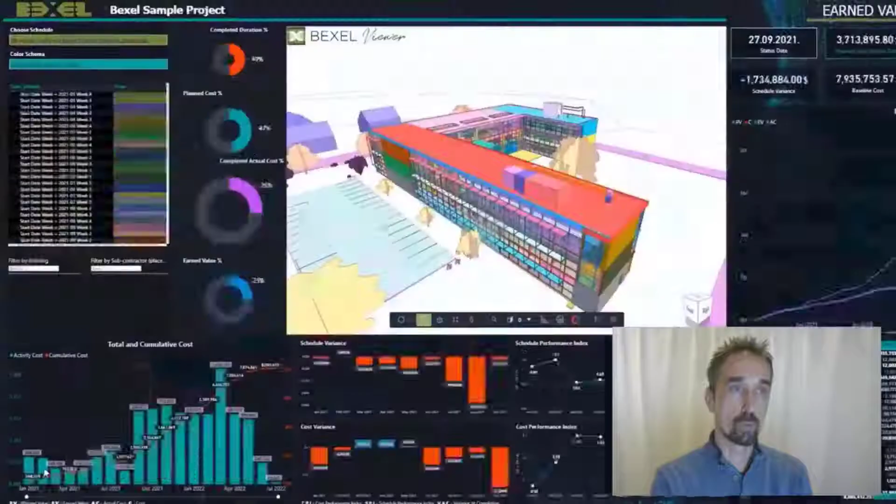What we wanted to achieve by integrating Bexel Manager workflows and new cloud-based solution is to establish a cloud-based single source of truth, so that users can access and manage project data, but at the same time publish and share all relevant information using our Bexel Manager online services such as Online Viewer, Online Power BI reports, and Portfolio Manager. Finally, we want to present our crucial information in a way that allows all project participants to clearly visualize and control all key project indicators using interactive dashboards.

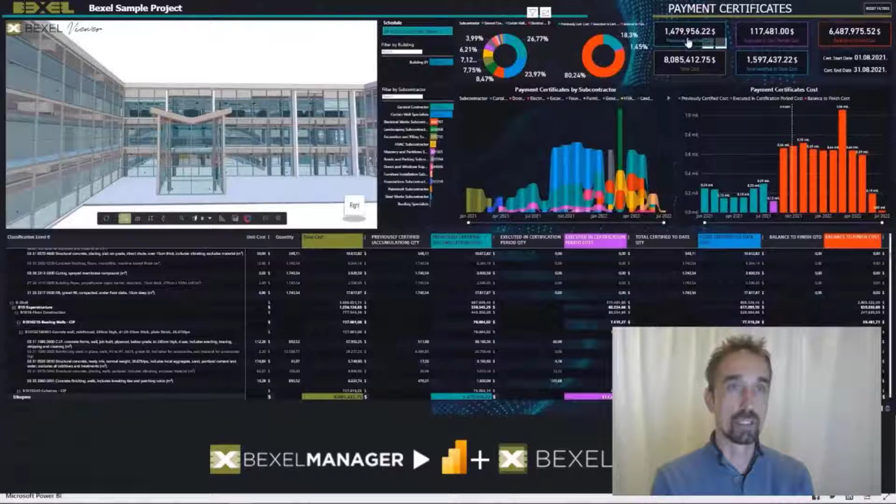Our goal is to utilize integrated BIM data so that produced information is already presented in our integrated BIM model in the best possible way. Our open cloud-based solutions will allow you not just to read this BIM information as professionals or experts, but also to present information in a very direct and easy way to all stakeholders in the project that don't necessarily need training or experience in advanced BIM applications and advanced BIM management tools to understand and use it.

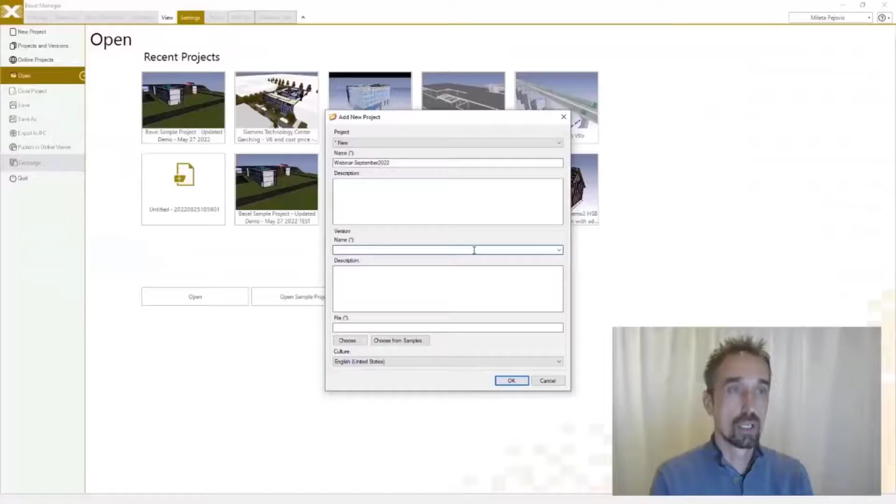Now I would like to guide you through the entire process step by step from the beginning, and we are creating a new project. The initial version of this project and its revision will be created, and we are selecting multiple IFC files that shall be federated into one BIM project. One of the most important things, especially in the early stages of a project, is coordination and collaboration of all project trades, and therefore frequent and progressive clash detection analyses performed on a project are extremely valuable. Our workflow allows you to almost fully automate the entire process by using our customizable templates for clash detection, and at the end to explicitly and clearly present all results using interactive Power BI dashboards.

First, we need to create some selection sets and organize BIM model elements into specific groups that shall be used for clash analysis. Here you can see a list of different templates for creating smart selection sets, and these are commonly used and can be reused on almost every project. In this case, I will use the one called Clash Selection Sets Sample Basic, and before loading it, I just want to explain how these template files work and how you can customize them.

On the left side, you can see the column which represents the location of your selection sets and in which location your selection set will be saved. The second column, which is called name, represents the name of each selection set. And the last column is called query, which represents rules that are used to create smart selection sets.

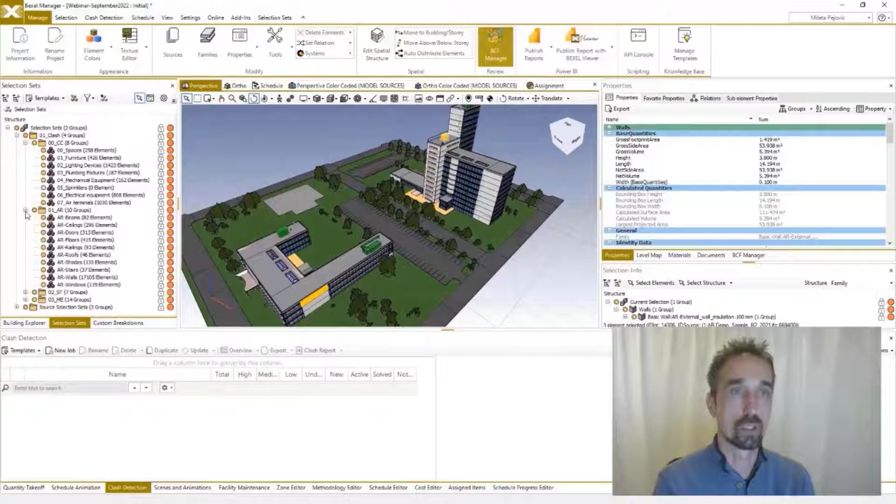Similarly, as we imported element groups organized by trades used to find collisions, we can also use available customizable templates from our knowledge base, and this knowledge base is at the moment local for each user, but very soon we plan to make this cloud hosted and available for all our users with respective credentials.

These predefined clash detection jobs are based on a common BIM clash matrix, and you may see how this Excel file looks. On the left side again, we have the first column with a list of clash detection jobs by different names, and we have also included severity of clash detection in their name.

First, second, and third priority of the clashes, and in the columns for the left and right clash detection groups, we are specifying which selection set will be checked versus a different selection set for collisions. And in the last columns, we are specifying clash type and tolerance if it's needed.

Once we decide or create the wanted template using the option open, these clash jobs will be imported into our system. You can see the list of imported clash detection jobs, and you see that the current result is 0 because we didn't run it yet, and now we can decide whether to run all clash jobs or only selected ones.

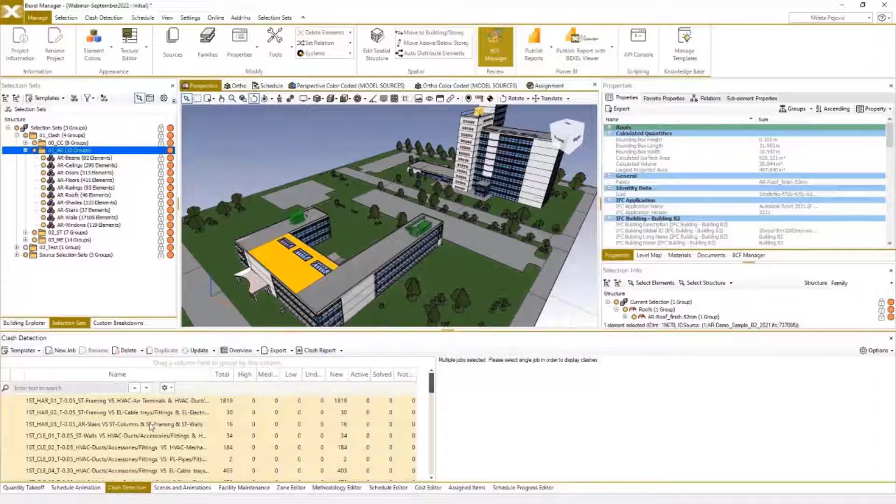And as in similar platforms, all results are listed and the user can go through each found result in the viewer just by clicking on it. For each found issue, we may see which element is included and what is the location of the collision in the model map. If we want to organize and group these clashes into multiple groups, the system also has an option for automation, and we can instantly group all the clashes that include the same elements.

In this case, I will use the option to group by left side, and as a result, the system will group all beams that are clashing with multiple HVAC ducts and pipes multiple times, grouping each beam with multiple collisions with different MEP ducts into one group. So now you may see that each group contains one beam colored in red and several ducts colored in gray that are colliding with each beam.

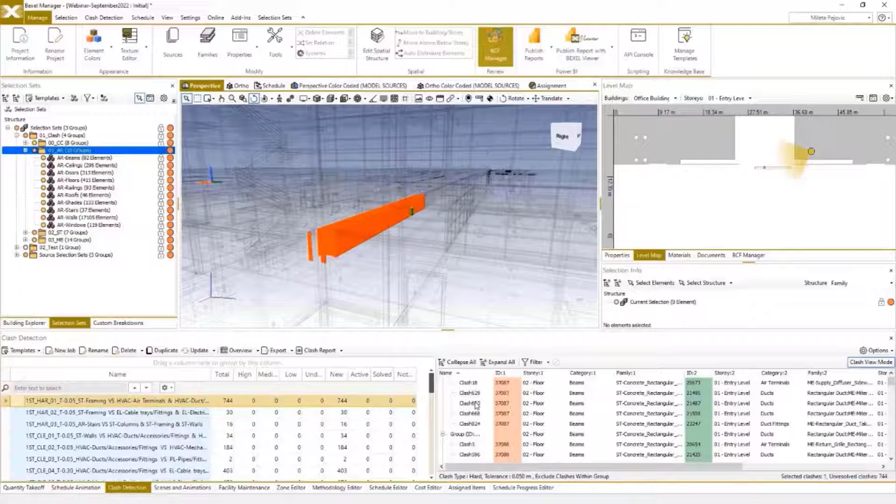All found clash results can also be organized into BCF files or exported into PDF, HTML, or Excel spreadsheets that are pivot ready and useful for progressive reporting of your coordination process. But to elevate the quality of created reports, we enabled the export of clash detection analysis into interactive Power BI reports with an embedded model viewer.

So to streamline the process of embedding the model viewer into Power BI, the steps are really simple and I will just show it. The user just needs to export the current Bexel Manager 3D project into an online viewer using the Publish to Online Viewer option and select options according to our preferences. We can even choose whether to export all model elements or just specific ones.

And we can also divide or organize BIM elements in our viewer based on IFC model sources or by selection sets or BIM categories. Once we decide, we can just click publish and the system will take some time to export the entire project depending on the size and also based on the number of BIM model elements and their complexity.

And of course, based on the internet speed as well, once it's completed, the system will give you information with a web link to access the published 3D model online. And if you're not logged in, you can log in to your account, and based on credentials, user can access different online models or projects.

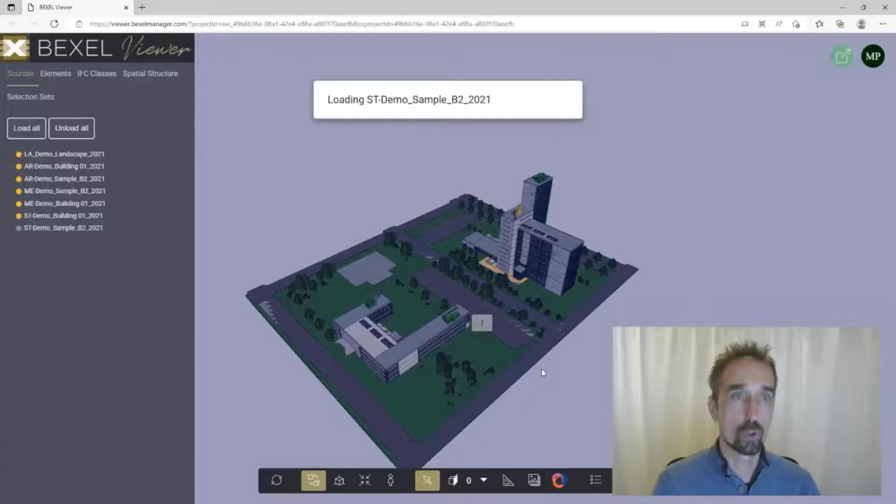Once you're logged in, on the left side, user can choose which models and sources they want to load in the viewer. In this case, I will load all, and as you may see, the system currently opens all sources of the exported file, and we can just review the 3D model using any web browser or mobile device.

All properties related to selected elements or to 3D model elements are also available on our viewer, and you can see all the values of these properties of selected elements. Since we also have exported selection sets from our project, we can see the list and entire hierarchy of these selection sets, and we can use this hierarchy to select elements or change their visibility, similarly as we could do in our desktop application just by clicking these visibility indicators.

Another useful feature here is the ability to share the exported online model with other participants, so you can just type in the email address of other users and they will be receiving a notification with the same online link so they can open it or review it by themselves. Of course, they also need access rights in order to use it.

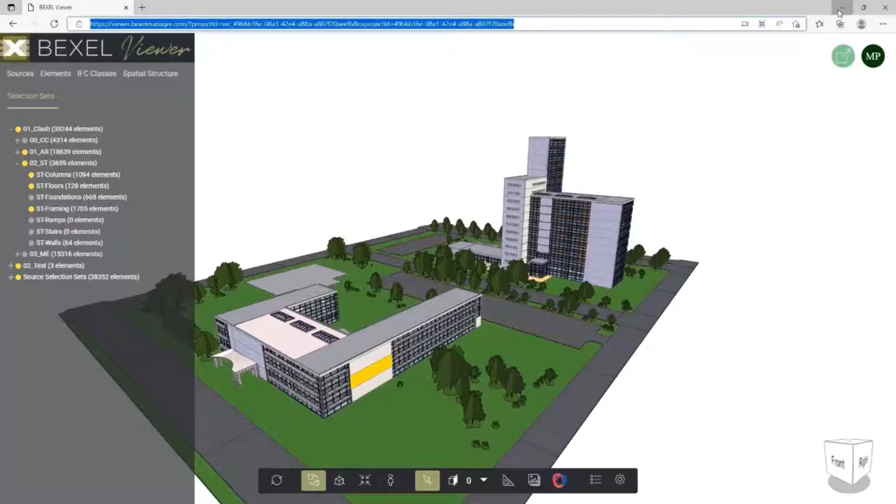So since we have this exported web address, we can copy the link and use it in our Power BI report. So the next step is to go to Bexel Manager and use publish Power BI report and paste this provided web link to our online model.

During this process, user can choose which clash analysis they want to export, and once the exporting process is completed, we can open the Power BI report using a Microsoft Power BI desktop application and edit visuals, charts, or even change the language if required.

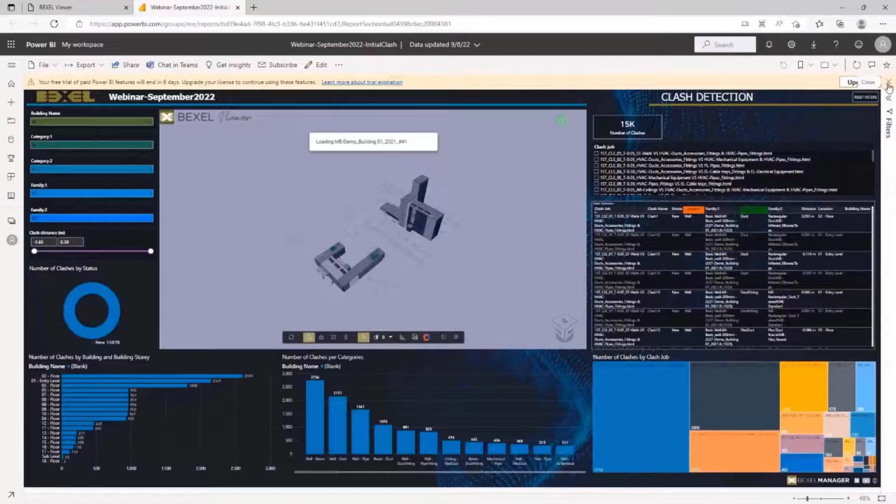I will skip this step and just show you the final published Power BI dashboard. This one is free and available as an out-of-the-box template, so anyone who has access to our online viewer can use these visuals and link it to any 3D model they create, and they can also use their own Power BI reports and adjust them according to their needs.

As you may see, the entire 3D model view is loaded. All 3D source files, since I checked that option, are automatically loaded. And on the right side, we may see the list of all clash detection jobs.

And since everything is interactive, once you select any of these clash jobs, the lower table will show you all these results, each instance of issues, and directly in the 3D view, you may see all these found issues distinctively colored in orange and green, so you may easily identify elements which are in collision, as shown in these tables in the corner.

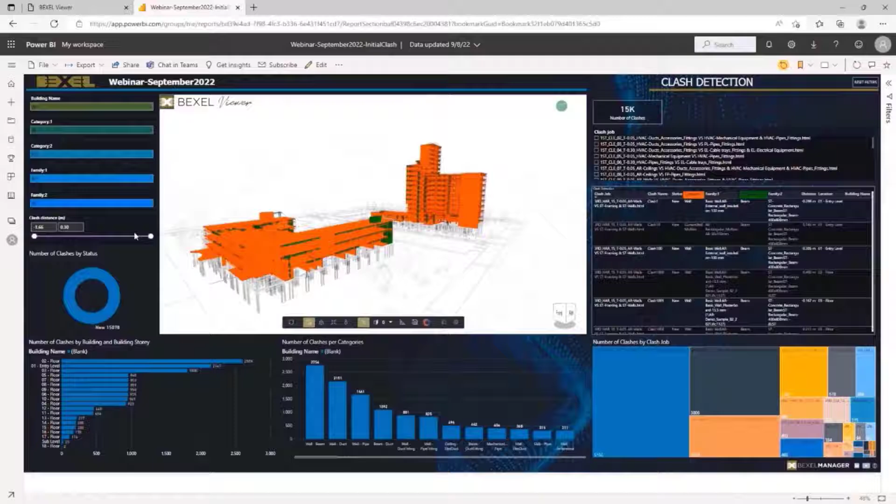In the lower part of this Power BI report, you may see that all issues are organized according to buildings and building levels, and in the middle, all found issues are also organized by different BIM elements. The slider on the left side can be used to filter down specific clashes based on the penetration distance between elements.

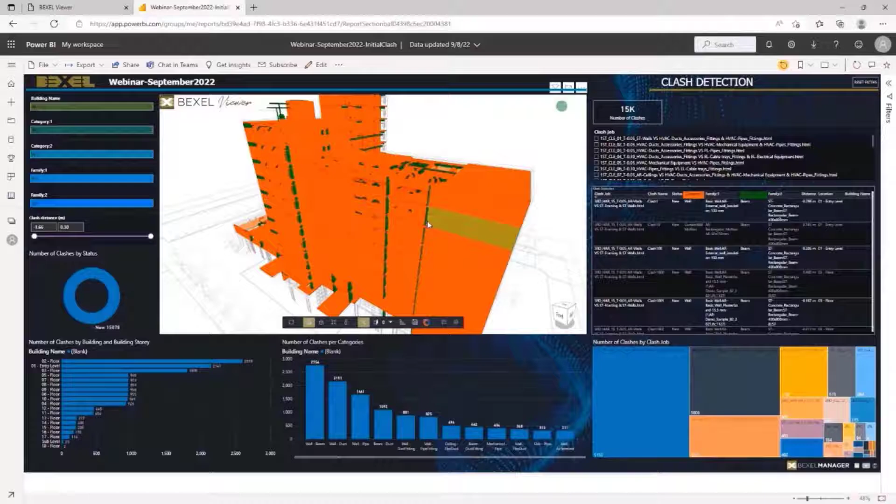These templates are free and available out of the box, but as I've said, if you have the Power BI desktop application, you may create your own templates, change their look, and change the information you want to show, and the process is straightforward. You don't have to do anything additionally to have the model view connected to relevant data because everything is already connected. You just have to publish your Power BI report.

Another extremely useful and new way to publish and share not just clash results, but all relevant project information, is using our cloud-based portfolio manager. It's a unique online platform that collects all BIM data from multiple projects and multiple revisions of any project. All data is saved on a cloud-based common data environment, and published information can be stored in a cloud-hosted database or on client premises. To use the portfolio platform, a user needs to be subscribed to this service and use credentials to log in. With the respective access rights, you'll be able to explore projects and information based on your credentials.

Results related to clash detection analysis can be found in this drop-down list, and predefined charts for multiple revisions of one project look like this.

The platform is highly flexible and gives you the ability to rearrange and reorganize these charts according to your needs. For example, you may track how the number of clashes was changing during different project stages and in different model revisions through time. All clash charts can be exported into PDF, images, or Excel files, and this platform can be accessed using mobile devices as well.

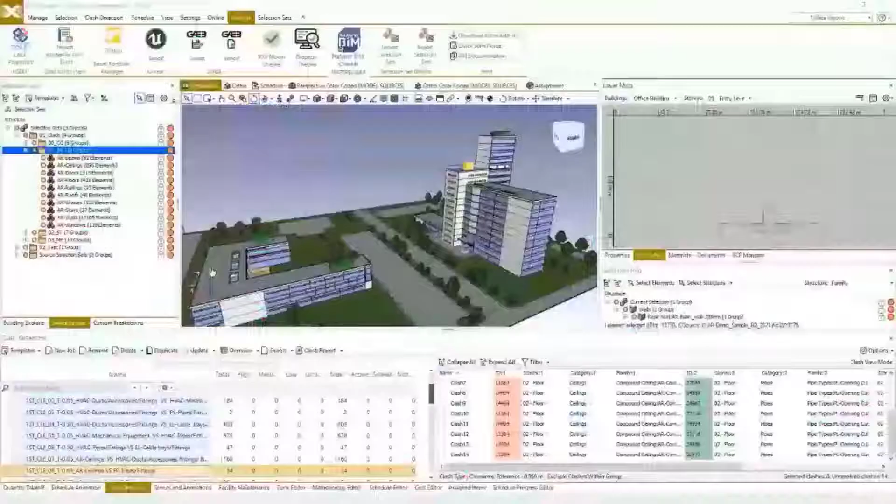The next step in the workflow is BIM data management, and Bexel as an integrated BIM platform allows experts to manage and inspect BIM data using advanced BIM data checks. The entire process is automated using add-ins for IDS verification.

Based on predefined check rules, the system can analyze if all BIM elements have added mandatory properties required for each project stage. These property checks are based according to international standards or according to any project information delivery specification. To execute the process, I will use an add-in called Property Model Checker, which can perform these automated BIM checks.

User can choose which file will be used for defining BIM check rules, and the file used for BIM check definition is usually Excel by default, since common users are familiar with Excel files and can easily change them, but we also have the option to use JSON files as well.

Using the import option, we can import some BIM check templates, and very soon these will be part of our free online knowledge base. So now I want to explain how this template file works.

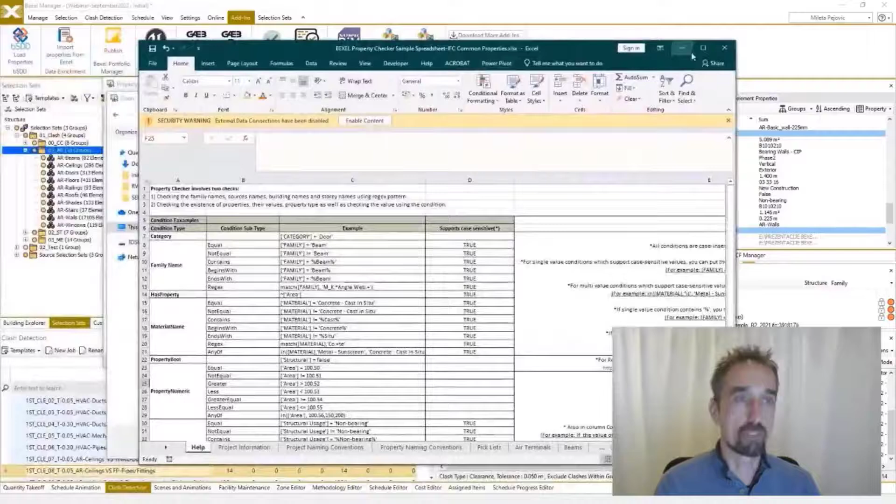The first sheet gives you information on how to specify and create your rules. The second sheet defines project stages in which required properties should be populated. You may add as many stages as you want.

Category name property is the place where you can set what shall be used to define various properties in each sheet. A commonly used option here is category, and then each sheet will be considered as a different category containing required properties. Project naming convention sheet is the one where we can specify naming convention and pattern for naming BIM files,

for building name, and for name of each building story, if there are any requirements related to that. Property naming convention sheet is the one where we are specifying or setting up naming pattern for different BIM elements or IFC entities. The first column is used to set different entities, and the second one is used to specify naming pattern for each of them.

In the property name, we have to set which property shall be used to check naming pattern, and in our case here we are using the IFC object type property for that purpose. Pick list sheet is used if we want to predefine specific values for any property and to specify all allowed or requested values for different properties.

Once we load the Excel template, the system will show us the list of recognized categories or IFC entities in the project, and we can now select for each project stage we want to check properties.

Each BIM check can be executed separately, or multiple checks can be executed simultaneously. Also, you can execute selected BIM checks for selected elements only, and results are visible instantly.

By using the option evaluate, the system will execute all BIM checks for all elements, and after its completion, the user can decide whether to create selection sets from these results or to export results to Power BI reports.

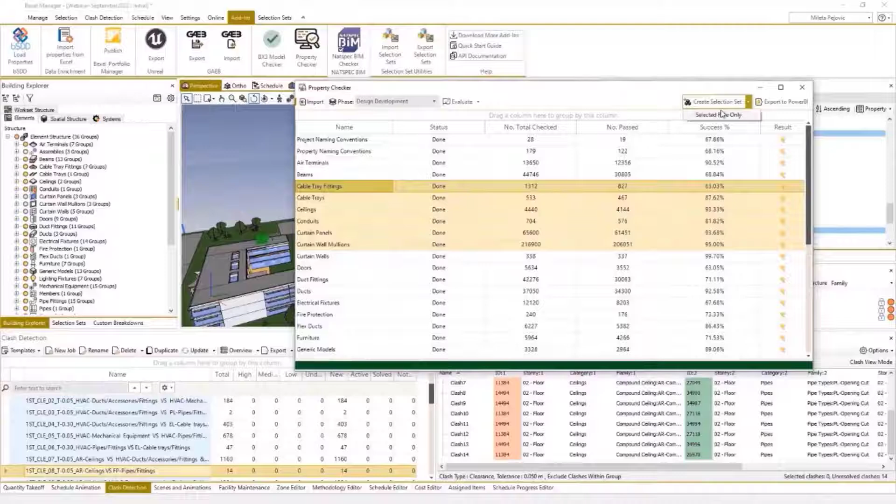It can take some time for the system to execute all BIM checks, and again everything depends on the number of properties that are required and the number of elements containing all these requested properties.

You can see how results can be explored, and also using the option create selection set, we can create selection sets of all these results or publish results to Power BI reports directly.

By creating a selection set for all results, the system will make all selection sets containing all found issues, and these issues can be addressed directly to BCF files just by drag and dropping from the selection set folder directly to the inbuilt BCF manager.

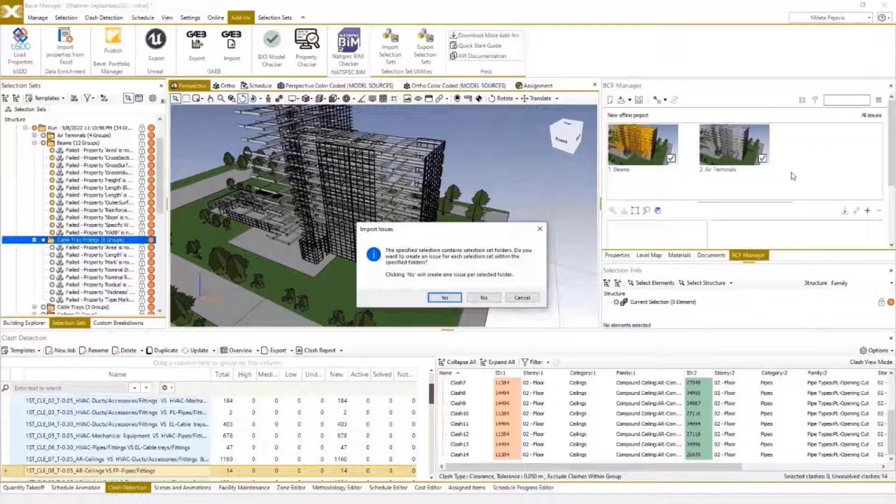By doing that, we can inform responsible participants or design teams to resolve these issues. This can be done for one or multiple selection sets at the same time. BCF files can be saved locally, or they can be communicated directly using an online cloud-based platform.

Now I will publish the results of this analysis to our portfolio platform. The system recognizes the project, and the revision will also be automatically and incrementally added online. When we go to the web platform, you will immediately see the updated published information.

For IDS property checks, initially the chart looks like this, so we can see the number of found issues is different in two different revisions of the same project. Visuals can be changed, and we can see property check results between version 1 and version 2.

Or we can just switch these tabs and reorganize charts. Also, we can do the same thing for IDS or BIM checks by percentages. And of course, this type of chart can be linear, or we can change it to bars.

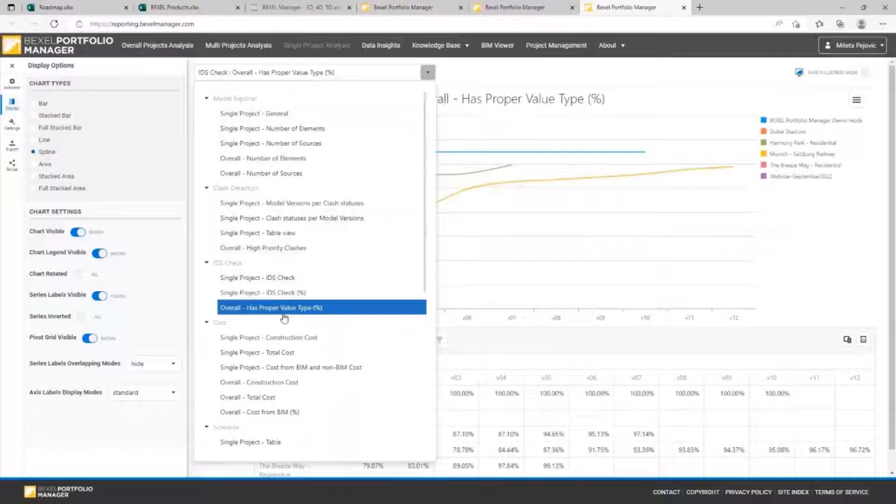We can change visuals if we want to see, for example, not just this revision of the project, but compare this project with other BIM projects and see how many property issues other similar projects had in a specific period of time or in a specific project stage.

As I mentioned, using Portfolio, you can also analyze other key performance indicators of your project revisions, such as the difference between planned and actual schedules and cash flows, various construction and cost analysis, or even earned value analysis. But I will talk about some of these reports later on when we explain schedule and progress entries.

Another extremely important thing I want to mention is that Portfolio Manager has a project and user administration where administrators can manage projects, project revisions, and users. Project admins can see projects and project revisions with respective information on who and when exported different project versions.

In the project user window, the admin can add or remove users from the project using their emails. This is also the place where different roles and permissions can be assigned to different users, and admins can create or delete entire projects.

Also, users can review the history of project revisions with the respective information, and admins can organize or delete these revisions as well.

Again, these are current options, but as I mentioned before, all these services will become part of our unified cloud-based Bexel Common Data Environment with more integration and collaboration options.

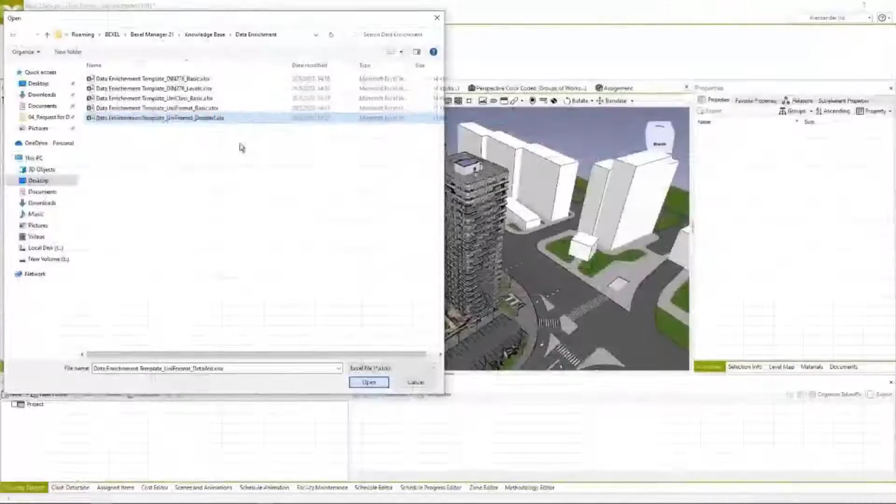Today I will use a bit more advanced template that uses 8 different properties as rules, and based on them, an entire property set will be added, and 2 new text type properties with the respective values according to Uniformat classification will be created and added to BIM elements.

After a short loading process, everything is completed. The data enrichment add-in also creates smart selection sets every time we run it.

And as you may see, the entire list of all elements with added property values. This can be used to check which elements got property values, and here we can also check if all elements are enriched. By selecting elements in the property window, newly added properties are visible.

Bexel Manager also has an online integration with the buildingSMART Data Dictionary, so it is possible to automatically download and add these properties to model elements. The process is very simple.

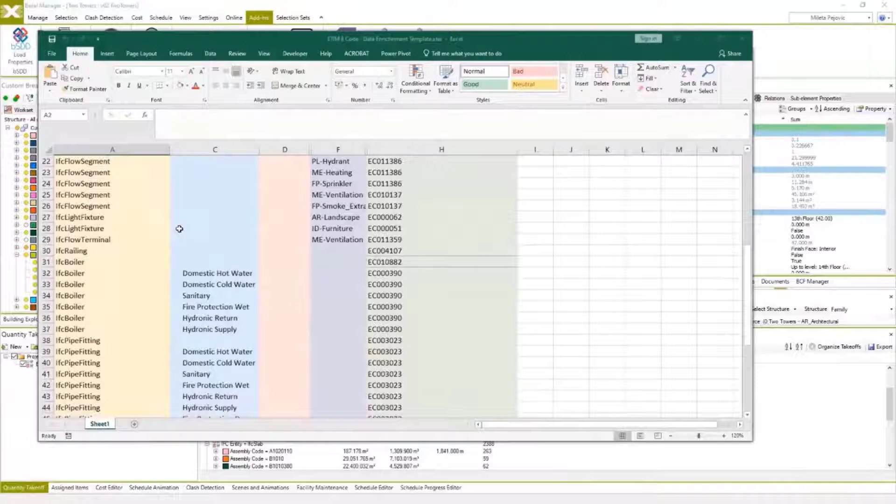To automate everything, I will use the data enrichment add-in again, but this time all elements will be enriched with a new property called BSDD code. This code will be used to match model elements with the respective ETIM8 database from BSDD and enrich elements with the respective properties according to the assigned ETIM classification. In the property window, all elements got various BSDD code values according to ETIM classification.

Now I will use the Load Properties BSDD add-in to connect with the BSDD database and select properties that we want to add to BIM elements. After completion, the system informs us that properties are loaded from BSDD service, and we can now explore all these downloaded properties added to different BIM elements based on their ETIM code.

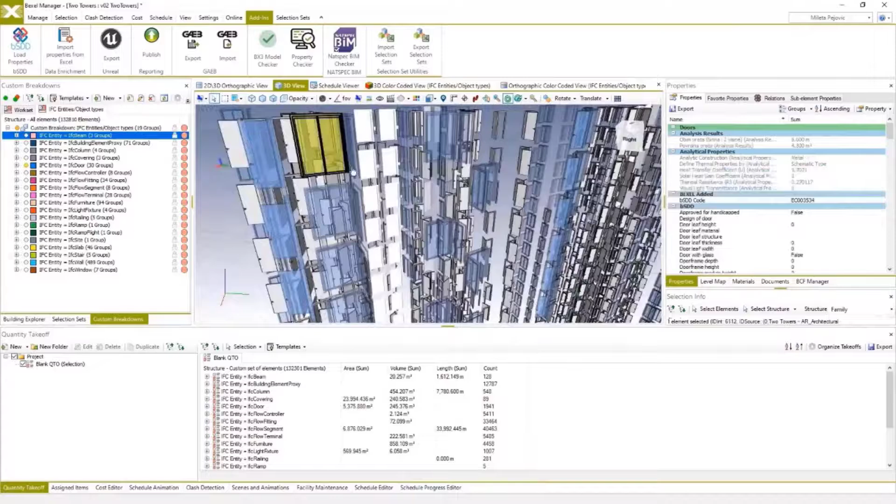In the custom breakdown, we can see that different IFC entities now have different BSDD properties added. For example, beams, doors, or slabs. Each entity has different properties assigned, and we can see the same for MEP model elements.

Now that required properties are automatically added, we can again automatically or even manually populate different values for each created property. All added properties and their values can be exported from Bexel Manager back to Excel files, or we can just export the IFC file directly from Bexel Manager, and all added properties will be saved.

The second approach is using existing cost classification standards or databases and importing them into Bexel Manager. In both ways, the system automatically calculates quantities and prices, so we can use it for further analysis.

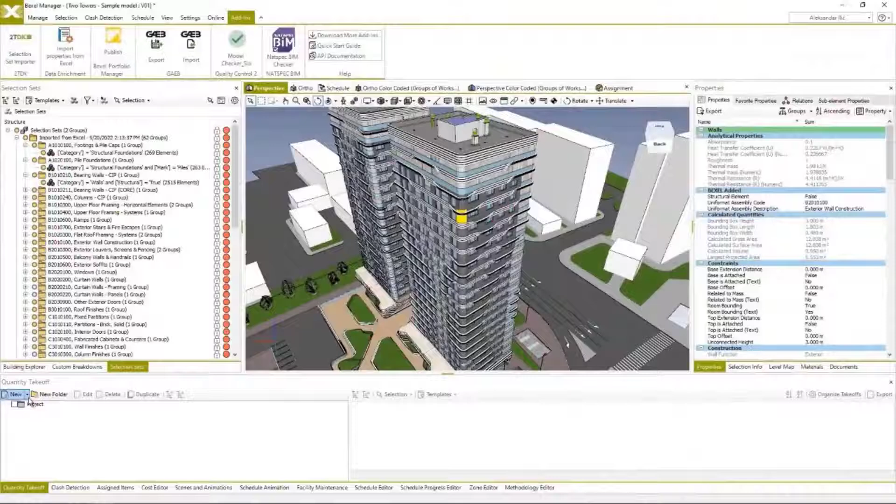The first step to cost estimation is creating a quantity takeoff that shall be used as a work breakdown structure. To do that, all model elements will be included, and for the hierarchy structure of the quantity takeoff, again we can use one of the templates from the knowledge base. These are some available default templates.

For any project, the user can create their own templates according to any standardized classification and properties used in their model. The applied template just organizes the quantity takeoff structure using the property uniformat assembly code that we added previously using the data enrichment process. Hierarchy levels are made by uniformat code characters, and in the last hierarchy level we are using IFC object types, since multiple types can have the same uniformat code and we need that additional clarification for each item.

Now we have the entire work breakdown structure for our cost classification organized as we wanted. This quantity takeoff and its structure will be used to create a new cost classification. To automate this step, I will again use the creation wizard, and of course the other workflow is even easier.

We can just import an existing cost classification that we already have and use on different projects, from Excel spreadsheets formatted in the way that Bexel Manager can load it. In this case, we will create the entire classification from scratch using this wizard. The process is straightforward. First, I will select the quantity takeoff that will be used to create the cost classification.

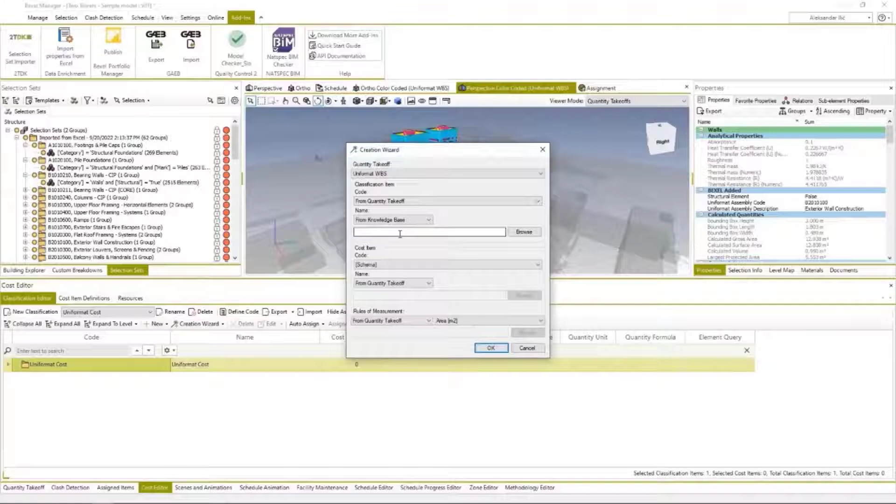The next option is used to choose how cost classification items will be coded and how classification items will be named. For this purpose, we can also use naming templates that in this case will provide the name and description of the classification item. It is another very simple Excel spreadsheet that you can create, or create new ones that are exactly suited to your company-specific or market-specific cost classification.

The next group of properties we have to define is the coding system for cost items. If you remember, when we created the quantity takeoff, the last level of hierarchy was IFC object type, but since these elements are almost always project specific, we usually don't have a coding for them. In that case, our system will automatically create coding for each cost item using a customizable schema that adds a suffix to the already used uniformat code.

For the name of each cost item, I will again use the quantity takeoff, so initially the name of each cost item will be according to different IFC object type names. In case we are usually making some standardized or prefabricated buildings, we could make a template for this as well. The last part is to define the rules of measurement, or to specify how the system will calculate quantities and prices of all model elements.

This is another place where we can use templates from knowledge base, and in this Excel the logic is similar to what we already have in previous uses of templates. In the first column we have IFC entities or model categories, and based on a few properties from other columns we can tell the system how to calculate quantity and price. So for example, for all cable trays, the quantity formula will be length and unit will be meters.

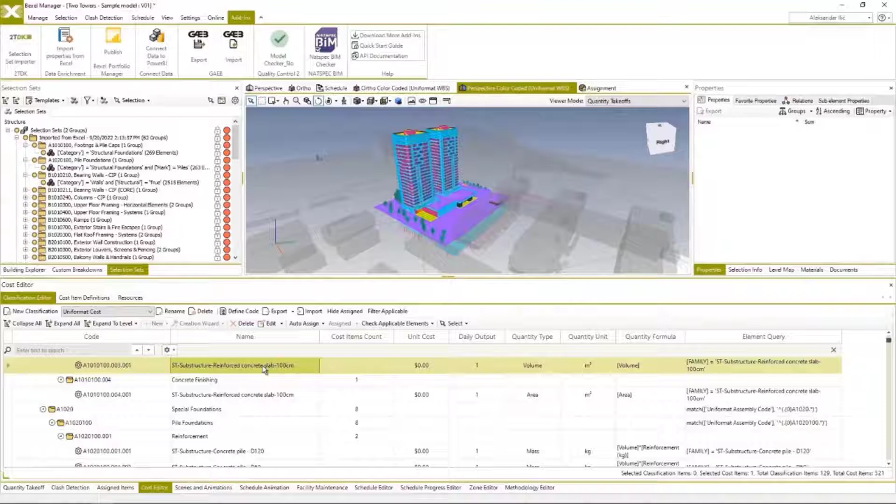It uses Uniformat classification, and you may also see the system created separate classification and cost items for this case: reinforcement, formwork, concrete pouring, and concrete finishing items, and each of them has a different calculation formula as we specified, and each of them will be in this case assigned to the same elements, so we don't have to model reinforcement or formwork, since the system will rely on the existing concrete elements and calculate them differently.

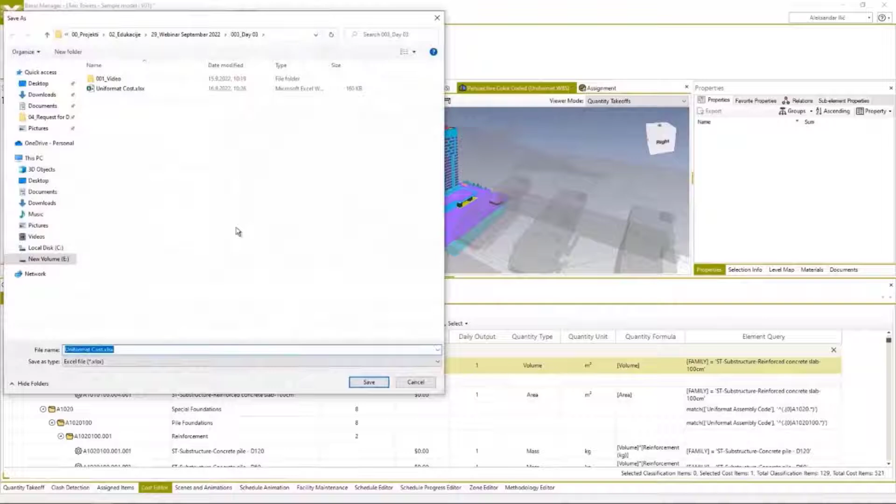Remember that we instantly created classification, but we still need to specify resources or unit prices for each cost item. We can define all this information right here within the system by providing prices for different subcontracts or actual resources. Or another possibility is to export created cost classification to Excel files. Exported Excel file is sometimes easier to modify. The exported classification is the same, with the same information as in application, but sometimes it's much faster to populate cost or resource information in Excel.

Users have the same options available and possibility to populate subcontract price from the market, or to really specify prices for each resource and get into details of each unit price. Now I will show you fully loaded cost classification with all cost item and resource information populated. Each cost item has updated values for labor, material, and subcontract cost, and even prices for different resources are provided, so entire project analysis will be more detailed and accurate.

If we go back to the application, we can simply import this populated cost classification from Excel. User can actually decide to update the existing cost classification, or to create a new one and later compare the price differences between different cost versions. In this case, I will just update the existing one. All cost items are updated, and as you may see, even resources and daily outputs are specified for each cost item. Now the project is ready to create cost estimation using another tool for automated cost calculation.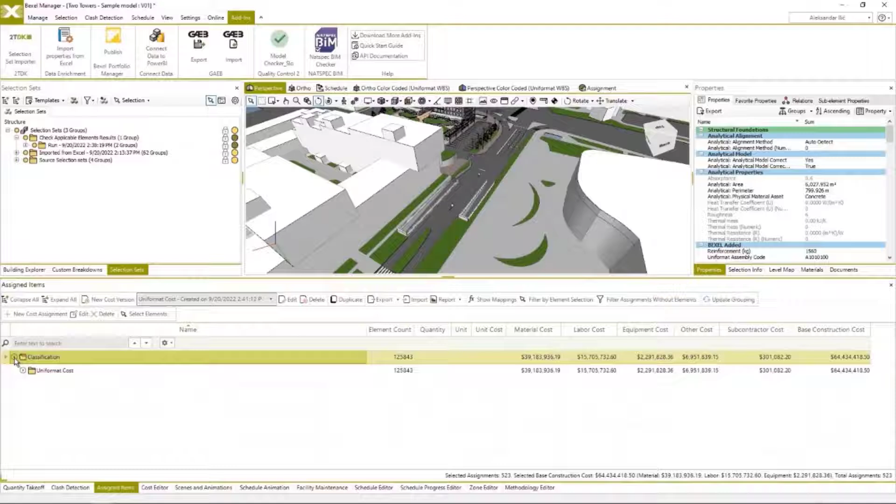By applying auto-assign command, the system will automatically assign BIM model elements to created cost classification. The computer algorithm will go through each model element and find all elements that are corresponding to certain rules defined in cost classification. It will calculate quantities based on calculation formulas that we have defined, and of course multiply it with the unit prices and create what we can define as a project budget or a bill of quantities. The process is more or less completed in 10 to 15 seconds for a model of this size. So the assignment process is complete.

We can go to the assigned items, where we are able to review entire project. We can review entire budget, which is auto-generated with specified price for each cost item. In this case, each cost item price is also broken down by material cost, labor cost, and equipment cost. And in some cases, we can also specify subcontractor cost for some cost items, where we had additional cost information for subcontractors.

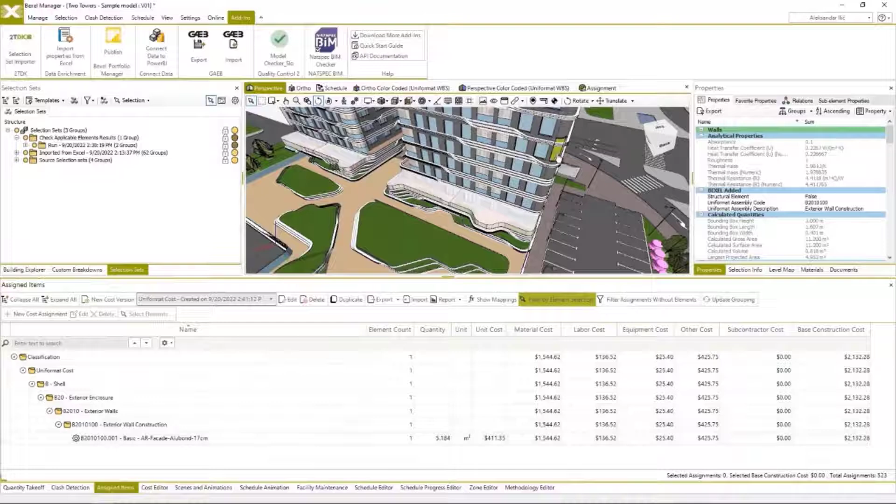Since everything is integrated, we could select items directly from the list, and respective elements assigned to cost items can be visible in the view. It also works in the opposite direction, so selecting any model elements in the view, the system can show us the cost items, quantity, and price. This time we can export 5D estimation dashboard, because that report covers complete cost information of the model.

And of course, in our next update, this functionality will be improved, integrated within the common data environment, and the user will be able to just simply choose the model revision from the drop-down menu. The next step allows us to choose the cost version from the project that we want to publish, and it is really up to the user to export one or choose multiple cost versions that they want to export online.

The last step allows us to choose which custom breakdowns we want to export, so these can be used for different color coding within the Power BI reports. When the export is completed, we can open the Power BI dashboard, and the first thing to do is refresh all exported data. The next thing is selecting one of the exported cost versions in the drop-down, and all tables will be populated. We can also select the color scheme available from breakdowns, but this will be available once the model is loaded.

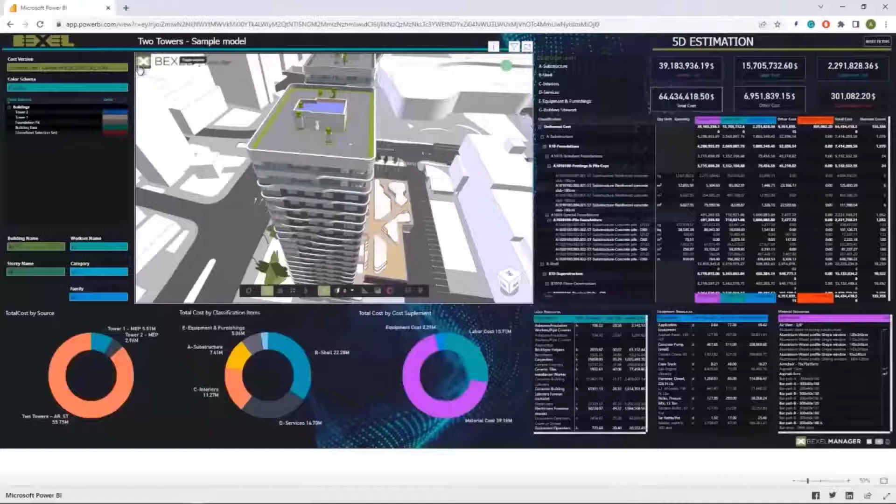To do that, we just need to publish this report online, and then, if needed to share the report with other participants of the project that aren't necessarily using our common data environment, we can generate a public web link. Once the dashboard and the model are loaded, we can again choose between exported cost versions if needed, and we can change the custom breakdowns that will be active. Based on the active breakdown structure, the model elements will be color coded differently.

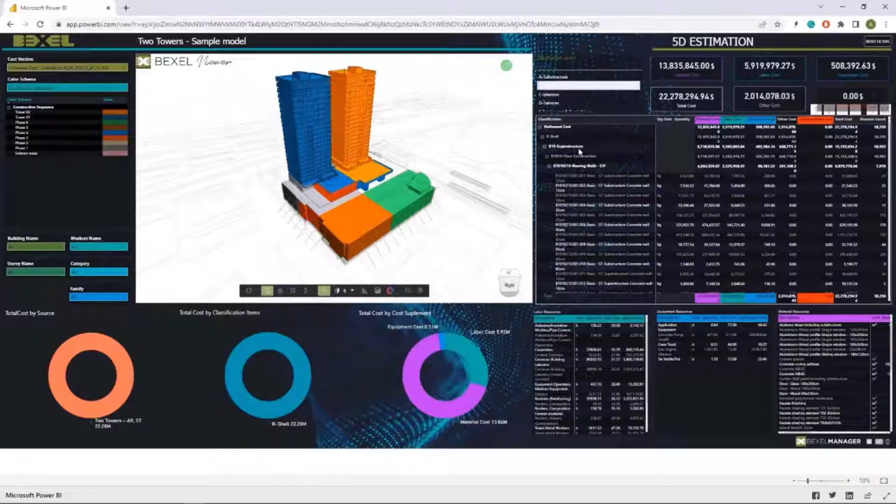On the right side, we have the ability to quickly filter elements by groups of works, and to visualize the elements of only a specific group of work. The user can select multiple groups of works, and whenever a cost item from the table is selected, model elements are clearly shown in the viewer, and at the same time all the charts are updated according to the selection.

Cost of the labor, material, equipment, all the resources related to certain elements, and all the charts are showing to which source these elements belong and in which group of works they are assigned. These charts are also showing the structure of these cost supplements and resources within selected elements.

Another very important and unique feature of the manager is that cost information is integrated to the lowest level of hierarchy, or to be clear, to the element level. This means that if you select any of the elements of the model, you're going to see the exact quantity, exact price, exact resources, and all other parameters for that specific element or group of selected elements. So when we're selecting multiple elements, all the parameters in the dashboards are changing at the same time.

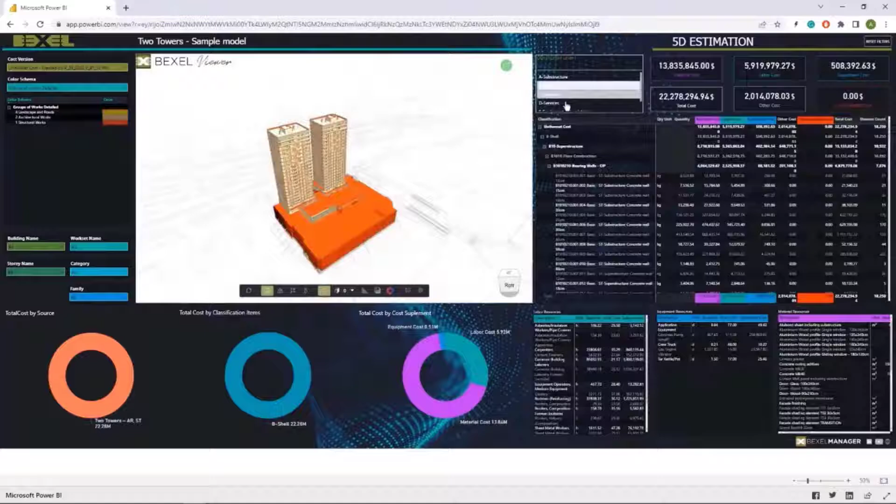As mentioned before, we can also change the coloring scheme, so the entire model can be color coded by the group of works. If, for example, the domestic water distribution group of works is selected, all elements included in this work group will be isolated in a view, and at the same time we can analyze cost and quantity distribution of these elements in different building areas. Also, necessary resources for this work group are presented in the charts.

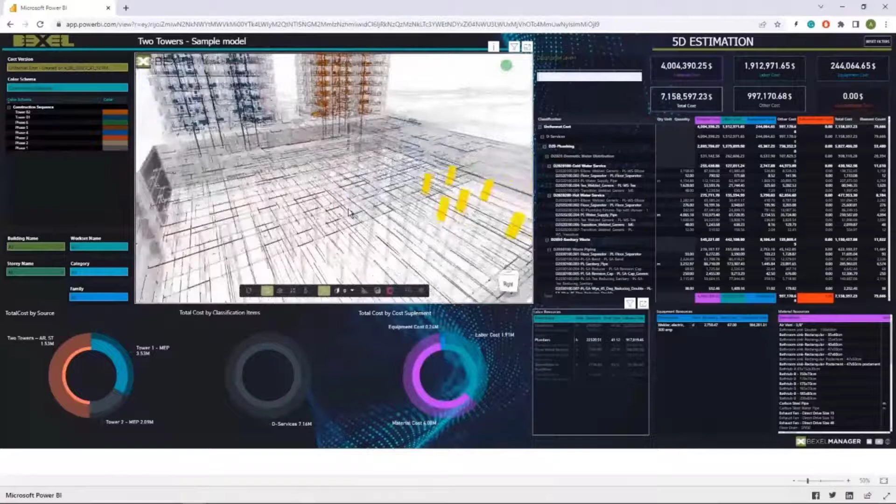The same can be done for different systems or work groups, and the system interactively and instantly will be changing the respective information for these selected elements in the view. It gives us a lot of flexibility for visualizing the data in the model, and we can even try to combine multiple filters and isolate specific structural elements on a specific building level. I think that you already understand the potential, possibilities and different uses of these kinds of interactive reports.

The next important BIM project workflow is related to planning and scheduling, and therefore we have a unique intelligent scheduling approach that again enables an automated process of creating a schedule instantly related to respective model elements and cost classification or cost estimation. The process relies on the already created cost classification, and now planners only have to specify spatial zones and sequencing logic between different work groups,

and the scheduling engine will automatically create an initial schedule by crossing these work sequences and building areas, where the system recognizes these activities based on linked BIM elements and cost items that are related to them. As I mentioned, the process is automated if necessary steps are followed. Firstly, spatial project organization has to be specified, and it's done using the zone editor.

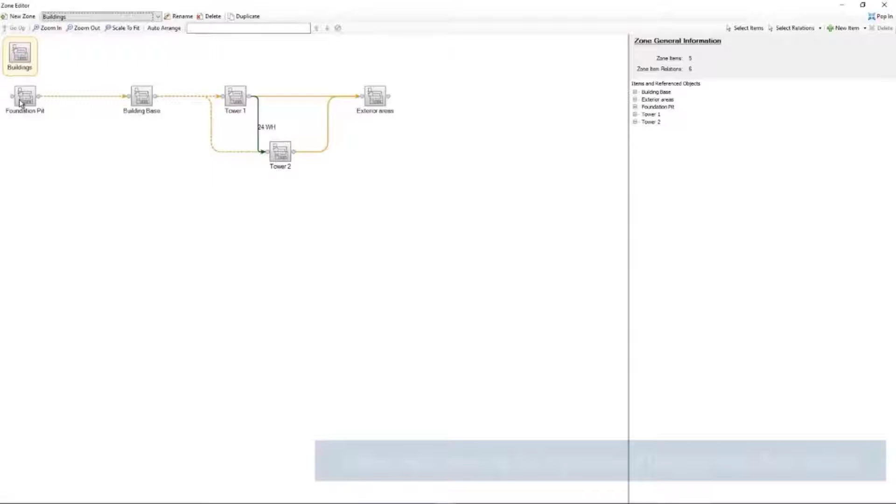Relations between spatial project zones are created here using selection sets. In this specific project, we used selection sets for buildings, then for different project phases. As you may see, the planner can refer to the model in the view and have a better understanding of construction phases, and then make logical relations between different phases.

Similarly, building levels and relations of sequence of execution of activities through building levels can be set within the zone for building levels. Once the sequence and relations between these zones are made, the next step is to specify the order of all activities. An entire sequence of activities can be created from scratch by linking to existing cost classification and cost items that shall be instantly used as respective placeholders for our schedule activities.

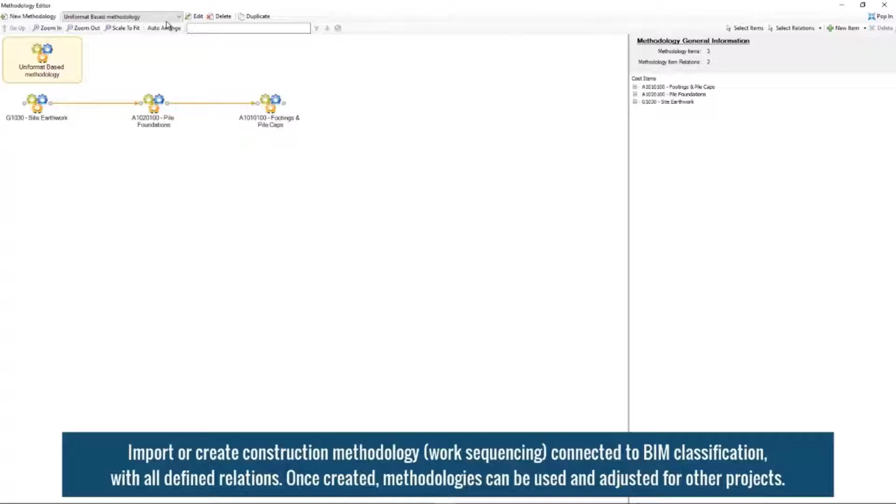It is very intuitive and simple to make logical relations between these items, but since groups of works and their sequence and relations between them in common construction schedules are more or less typical, at least for certain types of projects, for this specific common high-rise residential building I will import already prepared construction methodology from a previous similar project and reuse it again. Of course, certain adjustments are always needed, but it still gives us more time for further optimization when the initial schedule is at least created.

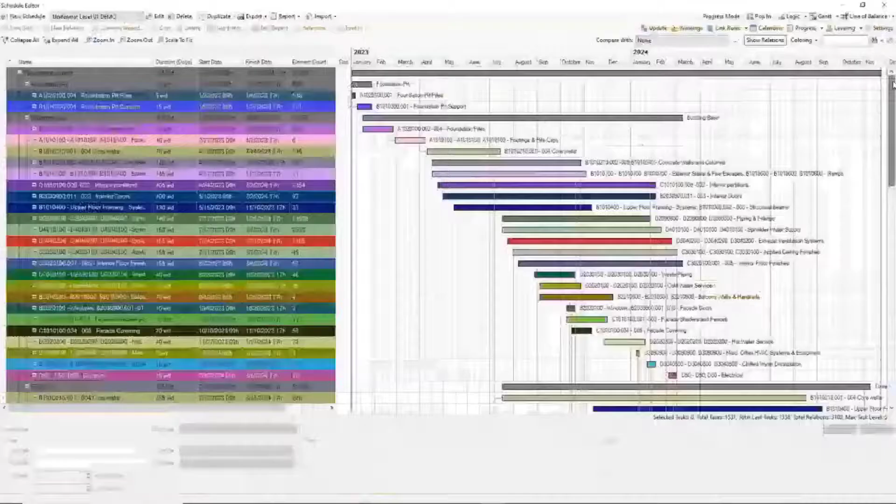Creation template is the place where the user can define level of schedule organization and their hierarchy. The computer algorithm then generates actual scheduled tasks and relations between tasks by spreading down all activities through zones in which activities are recognized according to the BIM model.

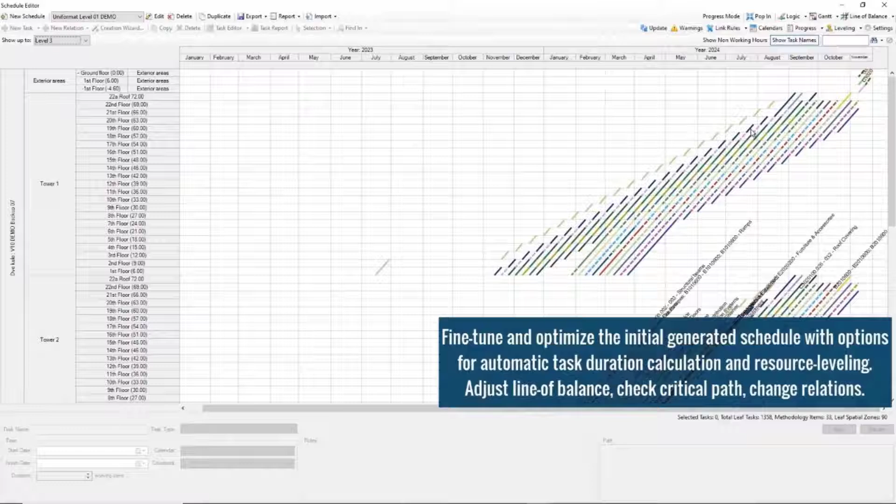The entire schedule is created using location-based planning, and on this demo project I tried to create construction zones so that each project zone contains almost equal working areas, so they can be executed with almost equally distributed resources. Therefore, the entire line of balance, which is also immediately available, shows us that our scheduling algorithm created the initial schedule already trying to distribute activities as continuously as possible. If needed, we also have more advanced options for fully or semi-automated schedule optimization, taking into consideration daily outputs or resource availability.

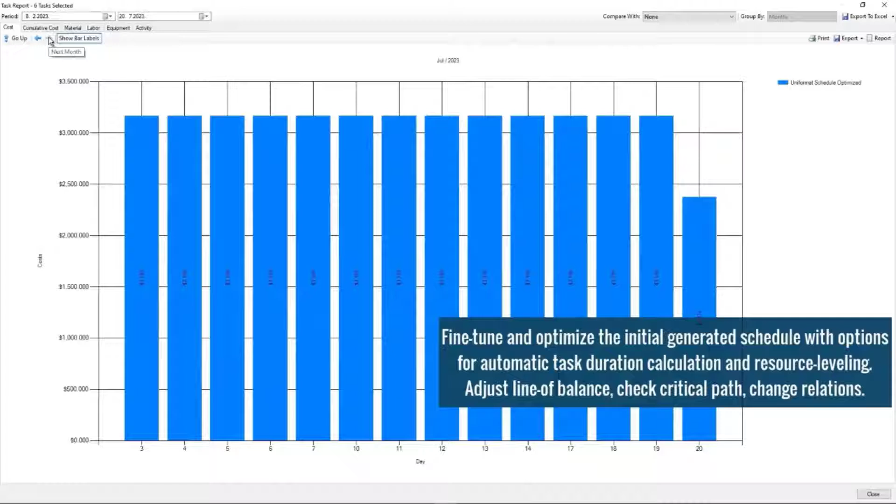In this task report, we have more instantly available information such as cash flow and S-curve for one or multiple tasks. Here we can analyze activities and resources and their allocation in detail. As you may see in this task report, activities are optimized and resources are more or less equalized. The same task report analytic is available for one task or for multiple tasks. In this example, we are actually looking at cash flow for one building and for the entire project in the corner. The same thing here for the S-curve showing our cumulative cost for one building and for the entire project.

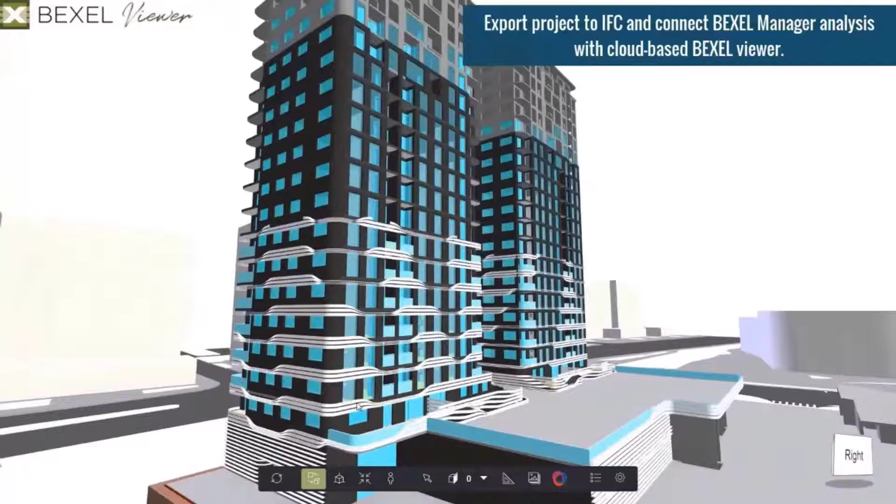Finally, when the schedule is created, the entire construction simulation is also instantly available. And since all BIM elements are at the same time related to schedule and cost estimation, we have all information available in this video. Since everything can be synchronized with our online environment and common data environment, we can publish the project online, and within the online viewer we can also review construction simulation without need to even use a desktop application. This is now available for all users with respective credentials to access using mobile devices and web browser.

When it comes to progress monitoring, once the baseline construction schedule is created, our system can also generate look-ahead plans or other template files that can be sent to the construction site using a cloud-based platform. On-site members can make progress reports using BIM elements representing executed works, and then this information is sent back to the office where progress entries are reviewed, confirmed, and entered. Once the progress entry is added, the actual schedule is updated and all changes are reflected in respective cost and quantity information. This animation shows us the optimized baseline schedule in the application, and these simulations can be shared as exported images, videos, or through an online view as you have already seen.

The first step in the progress monitoring process is to prepare look-ahead plans for a specific construction period and provide them to the site team. Using our API console and available template scripts, we can automate this process as well. Scripts are quite simple and you don't even need programming knowledge to edit and use them. For this exercise, I will use the one that generates selection sets of elements planned to be executed from the last progress entry date. We can also use a variation of the same script where interval duration and interval counts can be changed for more customizable look-ahead selection sets.

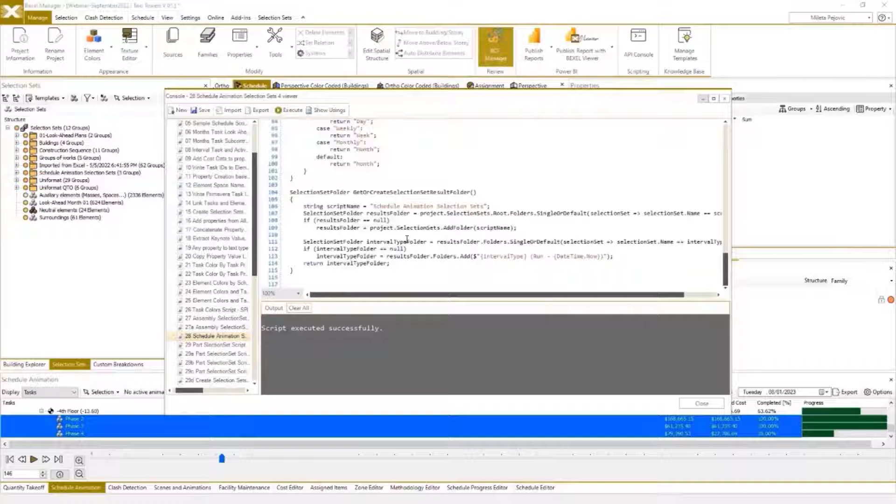Another interesting script is the one that generates multiple selection sets for the entire duration of construction simulation divided into specific intervals. Commonly used intervals are day, week, or month. Daily interval is the most detailed one, and it will group all elements executed for each day, and monthly will create a monthly selection set for each month of execution.

This selection set can be later used for construction simulation in our online viewer. Now we can go to selection sets and see results of these scripts. The first one created a selection set for 1 month, in our case a look-ahead for 7 months of execution, and all tasks planned for that month are organized into selection sets by task name and activity name.

In the selection set folder called schedule animation selection set, we can explore results of the second script, the one that will be used for schedule animation within the viewer. Any of these created groups can also be shared using an openBIM collaboration format or directly by uploading selection sets from Bexel Manager to the online viewer.

Firstly, I will use BCF Manager within Bexel Manager and just drag and drop the selection set here. As you may see, I also have saved BCF issues for each previous look-ahead plan in the past 6 months, and these can be directly shared online or can be saved as BCF files.

At this moment, we can load BCF files in our online viewer, but very soon we are planning to also make a live connection between the online viewer and Bexel Manager for synchronizing BCF files and selection sets automatically.

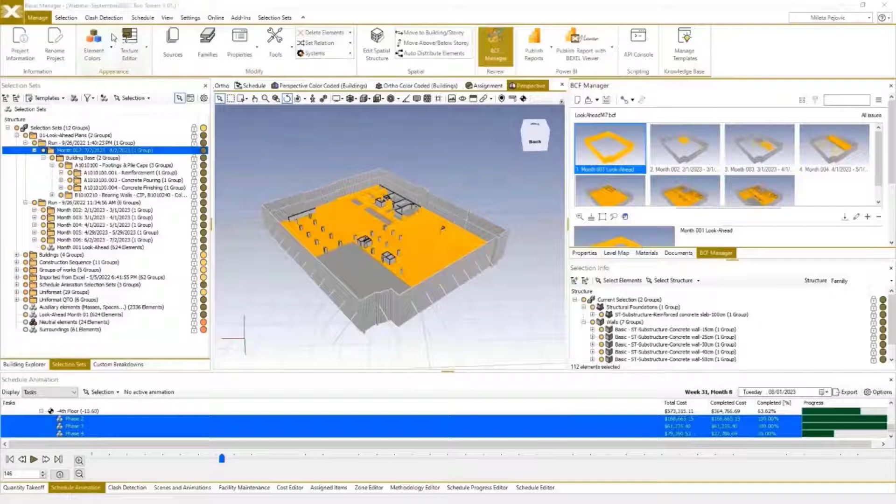Now when we have the entire project with the look-ahead selection set saved, we can share all this information by publishing the entire project to the online viewer. I will publish it using this option, and when we go to the provided web link, this is how the loaded model looks like. All selection sets are available as in the desktop application, and using the animate option, we can animate those selection sets that we generated for schedule animation using the script.

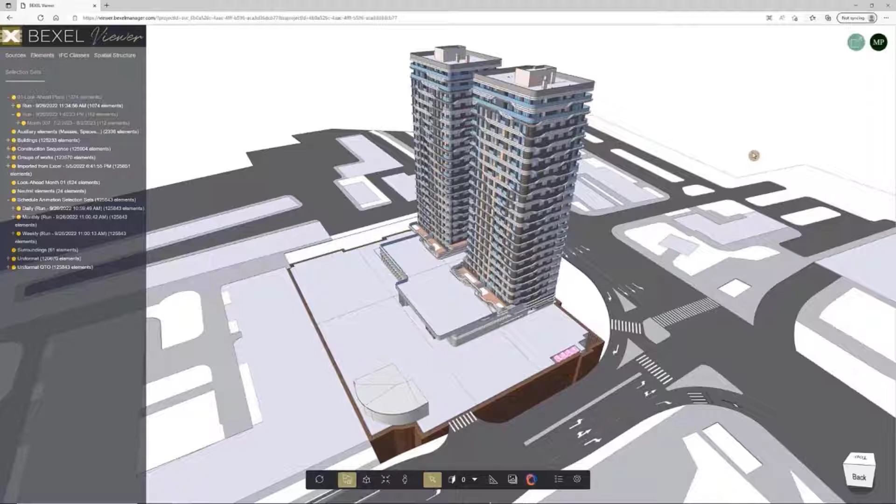Using the cloud-based online model viewer, site managers or subcontractors can easily review the entire project using mobile devices on the site, and they can use this existing information and element groups saved as selection sets or BCF files as some kind of guideline for construction works that are supposed to be executed and approved on site.

So they can easily isolate elements planned to be executed next month directly from selection sets, or these elements can also be selected and isolated by loading previously received BCF files.

Once construction activities are executed, our site team can update the provided selection sets and mark executed elements. All other elements which are not executed can be hidden, and the entire process can be done on a mobile device, and then the site team can save these newly created groups as another BCF file of completed works and send it back to the project manager or office teams for revision and final certification.

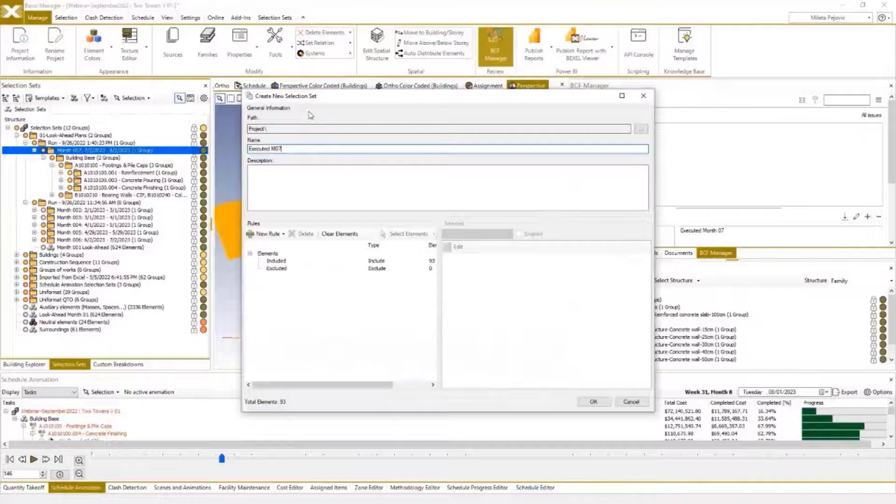The office team loads the BCF file containing executed elements, and these elements can be visually reviewed, and it is always good practice to save them in a way that we can have the entire history of all previously saved executed works for each previously entered progress.

Another good practice is to duplicate an existing schedule before making a new progress entry, so we can always review different schedule options, track history of schedule changes, or make advanced analysis of different schedule versions against each other.

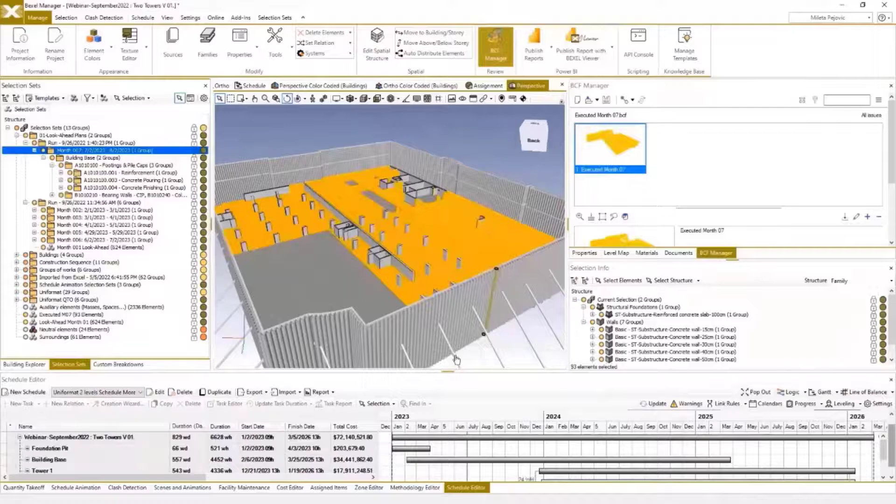For entering progress information received from the site and updating the actual schedule, the easiest way is to use our intelligent progress entry editor. This tool allows us to review the model and progress entries at the same time. So simply by selecting a progress entry on the left side or activities on the right side of this window, the system is selecting elements related to these tasks which are added in each progress entry.

In our case, we already have progress entries for 6 months, and we can easily find respective elements. The elements can be selected even for multiple progress entries, for example, the last 3 months. And the summarized cost of these works is also visible in the top row of this window.

On the right side, we can switch and see the task, activities, or classification hierarchy of all works executed in each selected progress entry. This gives us even more flexibility to accurately add and confirm executed quantities and to confirm spent price during their execution. On the right side, you can see each task and activity added in the progress entry and information about total quantity and price, and working hours spent for execution.

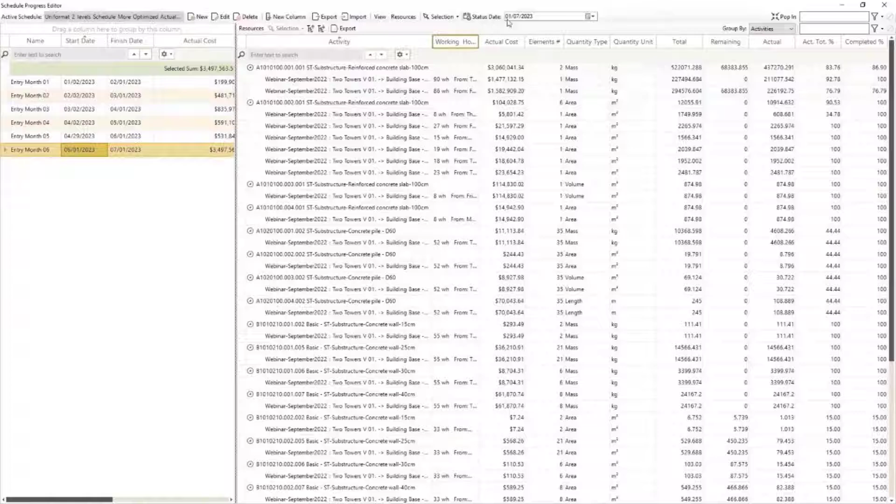Also, you may see information on executed quantity and remaining quantity in quantity units and percentages. And using different grouping, this information can be reviewed by scheduled tasks, activities, or by cost items related to these activities. Now I will make a new progress entry for the 7th month of execution.

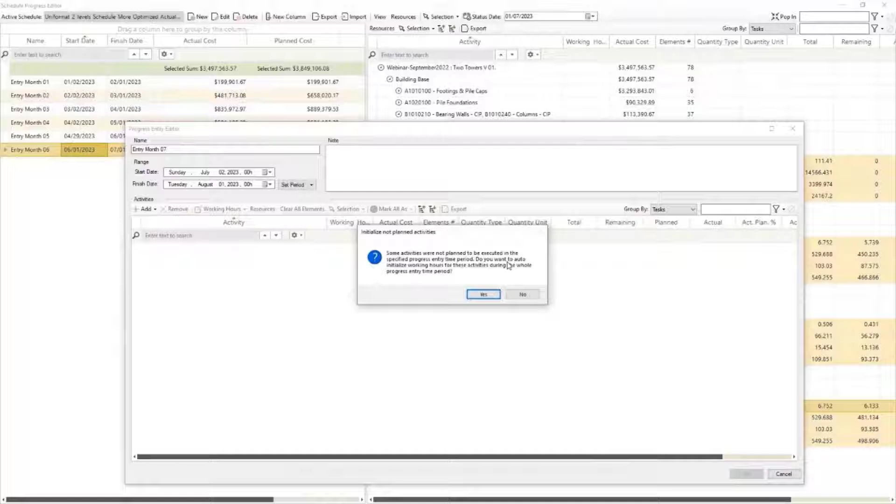Based on BIM elements from the selected group provided from site, our engine recognizes all tasks and all activities in which these elements from selection sets are supposed to be executed in that marked time range. Based on quantities of these selected elements, the system also calculates and populates actually executed quantities for each task. In the same way, percentage of completeness is also calculated for each task.

During this process, a user can always switch between different view modes: one to review activities for the previous period, and the other to review all tasks. No matter which view is selected, all respective information will be shown accordingly. This gives managers more time to review and confirm if these tasks, quantities, and percentages are reflecting the real picture from the site.

These values can be approved or changed before final approval of executed works. Also, if project managers have information from contractors or subcontractors about real resources used for execution of each activity or task, this information can also be populated and adjusted according to real use on site.

Just for the exercise, I will select specific activities such as reinforcement of footings and change resources spent for only these tasks or activities. I will increase used labor and also the quantity of spent material as well, telling the system that we had some unexpected expenses due to any reason.

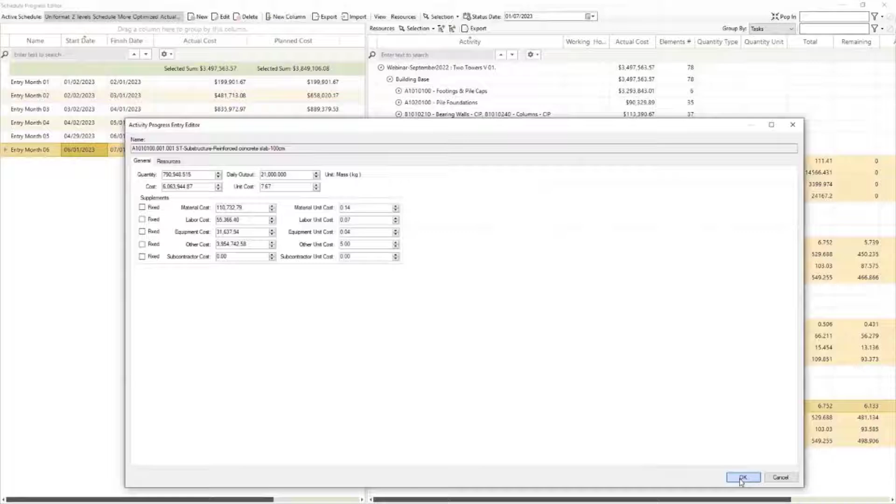By changing resource quantities, the system will recalculate actual cost and all respective information and performance indicators such as earned value, cost variance, cost and schedule performance index, and similar.

When progress entry is made by updating the last entry date, it is now very easy to compare actual and baseline schedule. I will pop up this window so we can compare it with the baseline and analyze some of the available information.

We can check key performance indicators such as baseline and actual cost, earned value, cost variance, cost performance index, or we could add more columns here, for example schedule performance index, which gives real information on how close the project is to completion compared to the baseline schedule. All this information is instantly updated for each task after each progress entry.

So now, for any selected task, we can analyze executed quantities for each activity, actual and remaining quantities, actual and remaining cost for resources, and also quantities of resources used for execution.

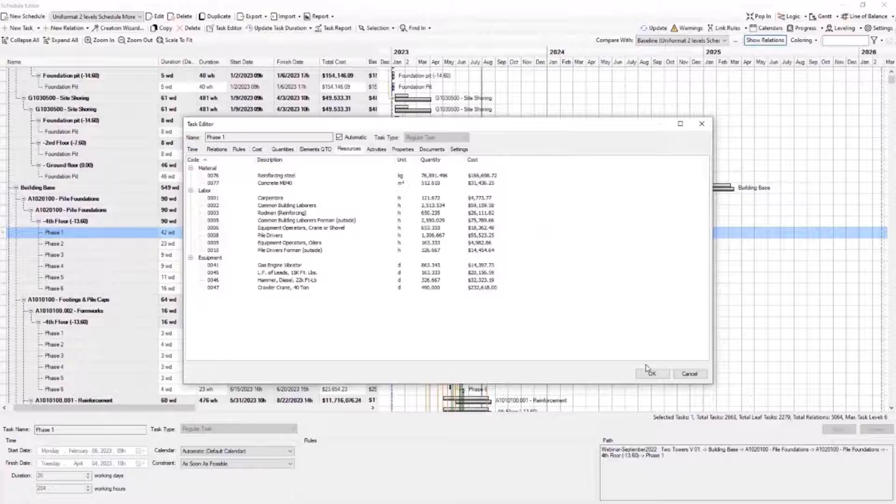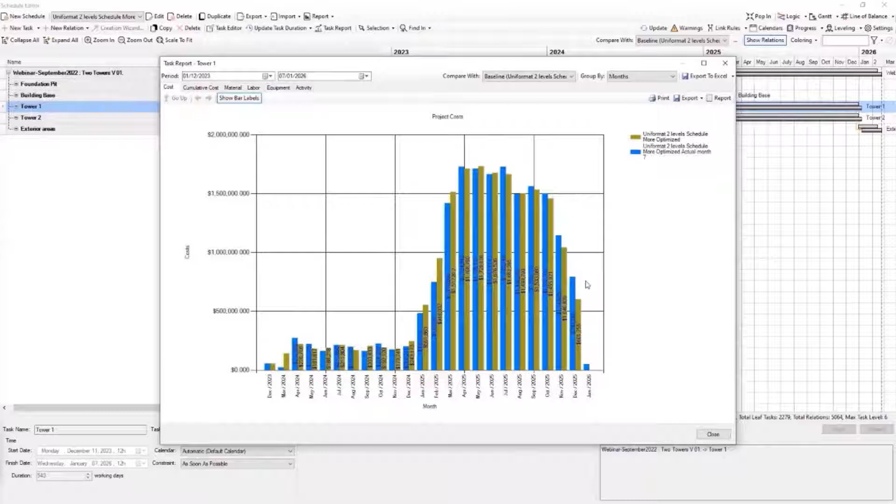In the S-curve, the same information is available, while in the material chart we can see filtered materials, just for reinforcing steel distribution, for actual and baseline schedule.

One of the benefits of an integrated system is the ability to export all information directly to Excel or share it with relevant participants of the project.

There are a few other ways for information exchange, and one of them is exporting Power BI reports into customizable Power BI templates, providing all previously seen information, including an embedded online viewer, as you already saw.

For this exercise, I will choose to export earned value analysis. At this moment, I will paste the same link of the previously exported online viewer model, but as I've said, we already made integration with our common data environment, so users can just select the already exported model viewer from the list of online projects.

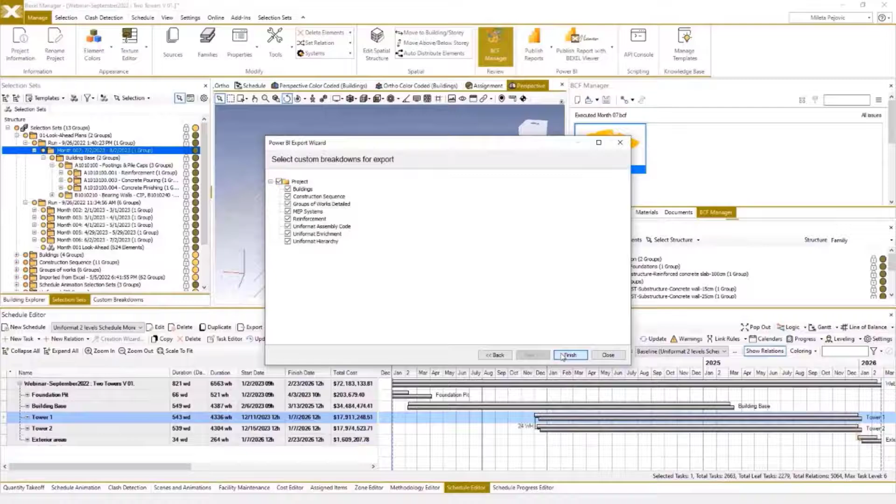From this window, the user can choose the information that will be exported, in case they want to perform more advanced analysis and compare multiple schedules with each other. Additionally, you may choose if you want to apply some color coding rules in Power BI, creating or applying custom breakdown hierarchies. I will export all this and then save the file.

The exported Power BI dashboard template for earned value analysis is ready, and I have already refreshed all the data and everything is loaded. Just to demonstrate how simple the entire process is, I will actually publish the Power BI template online and then check the results with the entire model viewer embedded and visible.

I will now open this dashboard. Since this is a free template, it is already organized in a way that everyone can easily read and understand the presented data. The embedded view shows us the model, while on the other side we have the indicated status date and all calculated key indicators such as actual cost, earned value, cost variance, and more.

The S-curve shows planned and actual cost, and planned and earned value. After the last entry date, the actual cost line is flat since we still didn't make progress for that period. On the bottom, all tasks and activities are listed with respective information for quantity, cost, and earned values.

Values for performance indicators are only changed for activities that have progress entries, in our case mainly for substructure works. In the middle, you may see how the schedule performance index and cost performance index change during execution.

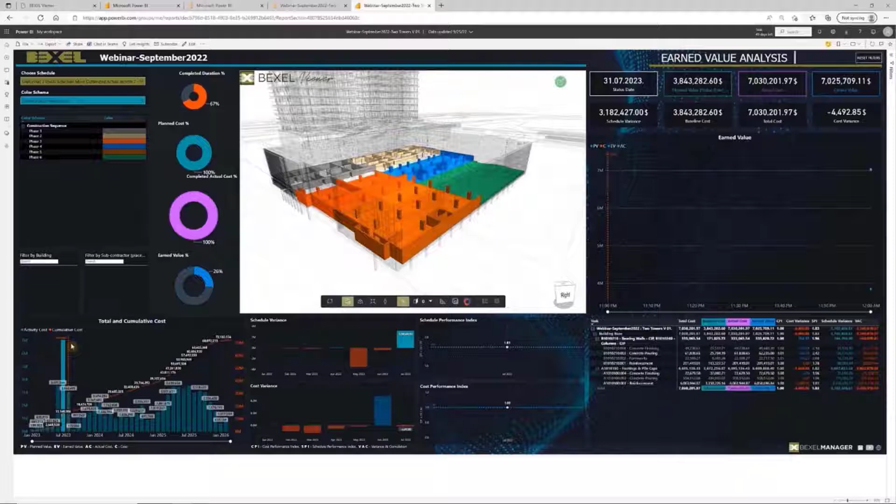We may even select multiple months in our cash flow, and in this way we can see all executed activities from the beginning, their key indicators, and colored by zones.

And if we had a subcontractors breakdown, we could even select elements by subcontractors.

In the list of all items in this period, we can analyze quantities and cost by selecting any of the cost items, and respective elements are filtered in the 3D view. These are core walls that are still not executed, and you may see only planned cost and quantity information are available.

Even here, by selecting multiple months after the status date, we are basically making a look ahead of elements that shall be executed in the selected period. Since I also selected the last progress entry months, we have planned and actual values visible as well.

Since information for each element is exported, we can even select elements in the 3D view for core walls one by one, and the dashboard will change all relevant indicators only for them. But since core walls are still not executed, we only have planned values.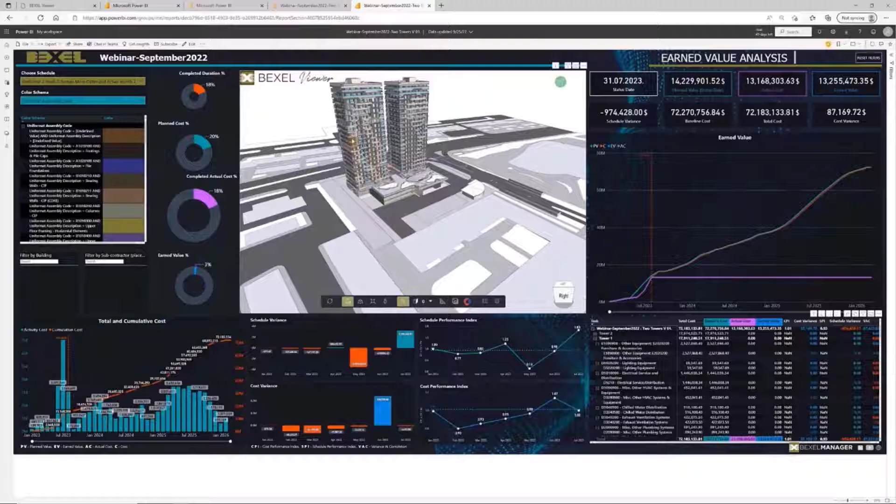Again, we could change the coloring mode and color the model by uniformat codes if we need to analyze specific items in more detail. For reviewing executed foundation works, we could select only uniformat A classification items and then select the ones we want to analyze, for example, foundation slabs.

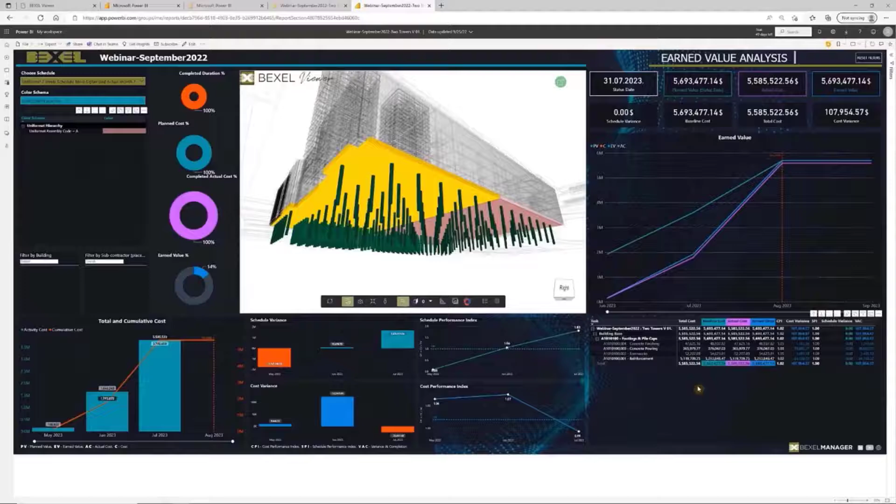As I'm selecting it, we may see if we are making profit by executing these elements, and also if we are ahead or behind schedule. So these types of reports have great value for managers and executives.

The next Power BI dashboard is very comprehensive and is mainly intended to be used by subcontractors or cost and project managers interested in very detailed analysis related to each resource used in construction.

Again, in the middle of the report we have an embedded online viewer, while on the sides we have multiple charts dedicated to material on the left side and labor on the upper right side, while main key performance indicators related to equipment are visible in the lower right quadrant.

Each table contains listed resources of the respective type, and for each column we have calculated values for cost, quantities, performance index, and so on. Again, these charts are very advanced and detailed, and we can use them to help subcontractors.

Understand their performance and optimize their processes in order to eventually achieve more profit.

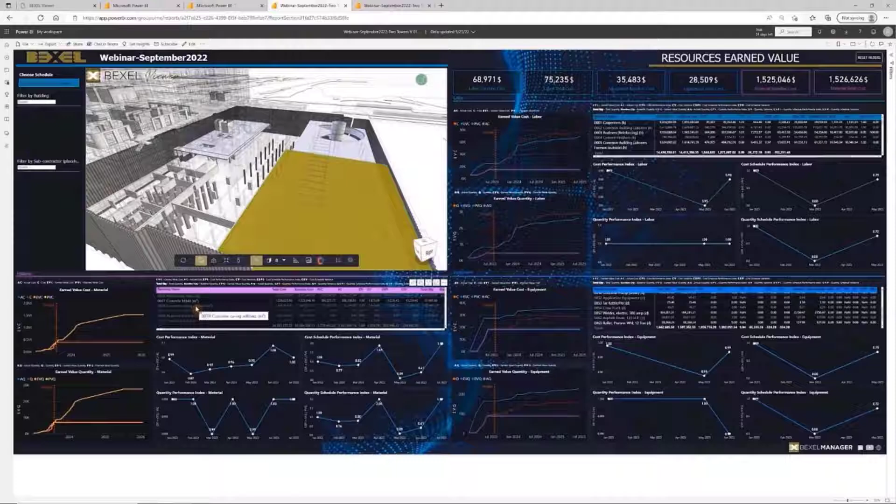Since everything is interactive, by selecting any resource item in the charts, the elements related to activities where respective resources are used will be also shown in the view.

At the same time, all charts are instantly changed based on information from selected elements, and we may explore, for example, some executed structural elements and see these results.

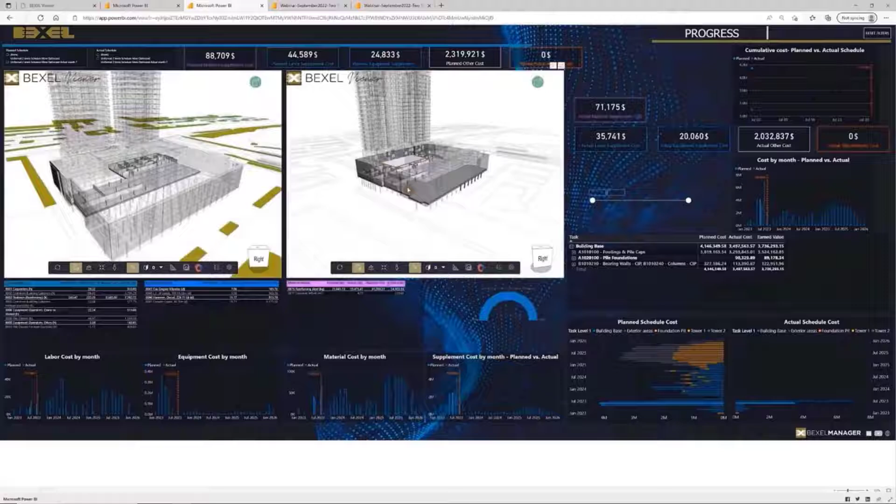This progress report Power BI dashboard is just another example to show you the potential and possible use of available data, and how we can even compare the baseline schedule in the left view with the actual schedule in the right view.

Similarly, as in the previous dashboard, by selecting any chart item or cost items from the tables, instantly all information in charts is updated and related elements are selected in the view. So we can review some of the executed structural works.

Again, all the data for all these dashboards are extracted from exported files, and it is more or less the same. These are just templates that give you an idea how you can differently present and report all this available information by creating different reports.

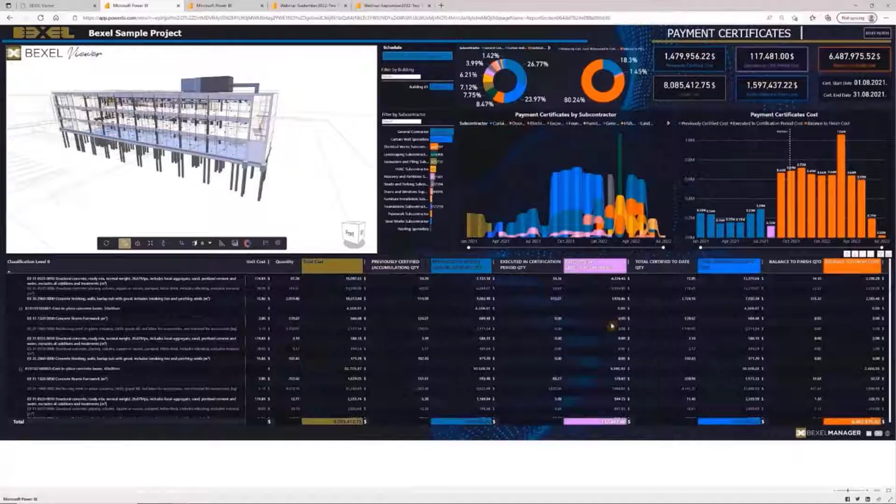The last example is a payment certificate template that contains a typical payment certificate sheet containing columns with planned or contracted quantities and cost, while in other columns, as a result of progress entries, we have information about summarized total quantities and cost for executed works until certification date.

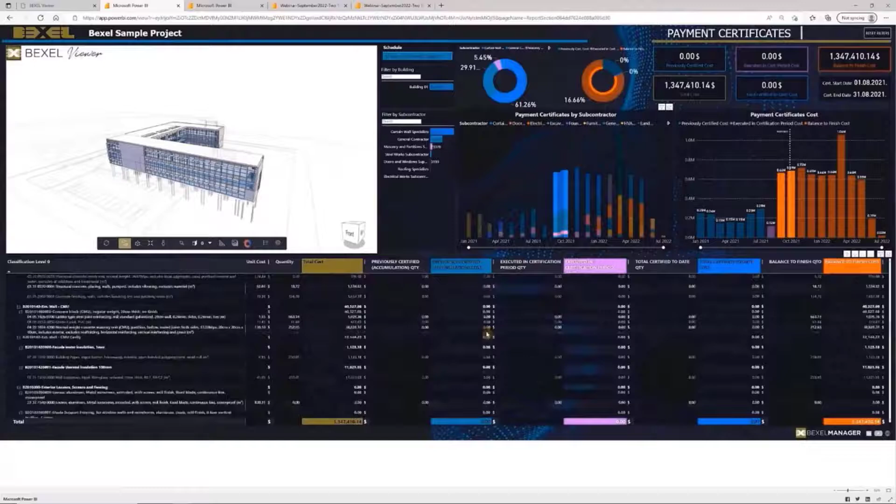We have cost and quantities executed during the certification period, which is usually one month, and we have remaining quantities and price to complete construction. Since everything is connected, for each model element, we can see information presented in a table or in a chart.

Beside Power BI dashboards, another useful way to publish and share all important project information is using our cloud-based Portfolio Manager. I will use the Publish to Portfolio Manager tool and export the current project and its latest revision online.

When the data is published, I can access our online platform and see results using a web browser. This online platform is created to collect all the BIM data from multiple projects and multiple revisions of any project, and all data is saved on a cloud-based common data environment, and the entire platform is very flexible and interactive.

Another important thing I would like to mention is that all data can be accessed using the Bexel REST API, and this way the number of possible customizations or integrations of Portfolio Manager with other applications is almost unlimited, and you may create your own information exchange ecosystem using it.

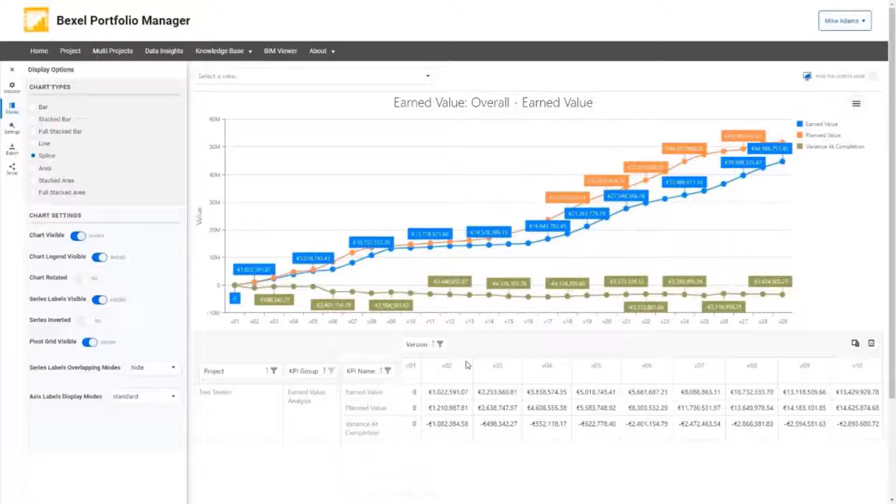For the end, I would like to briefly introduce you to our unified cloud-based common data environment for our users. This will definitely change information exchange workflows and hopefully will become a real single source of truth. The entire cloud-based platform will be used to create, access, and manage all projects and use our online services, based on users' credentials.

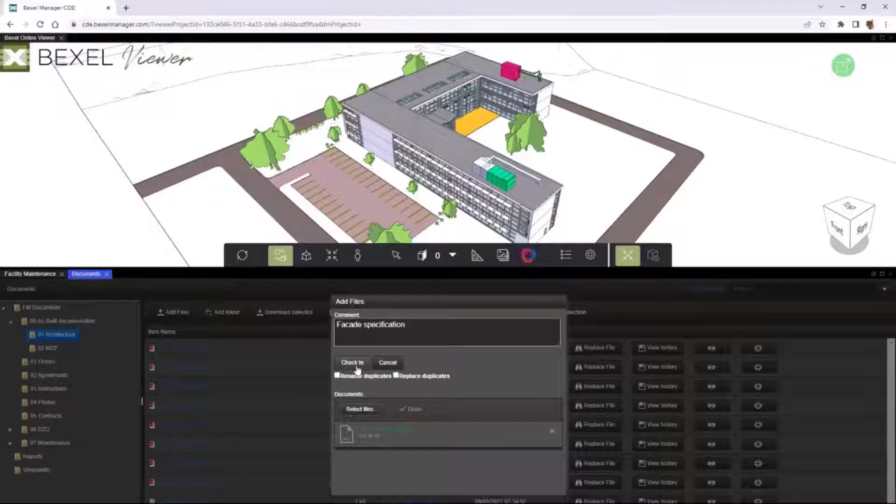Another big step in our development of the cloud ecosystem related to our products and workflows is project asset management and facility maintenance. As you already knew, within Bexel Manager FM desktop modules, users were already able to create maintenance plans and respective cost estimates, and also it was already possible to link all relevant project documents directly to model elements or FM plans using an integrated cloud-based document management system, and the entire cost estimation for the operation and maintenance period could also be tracked.

Progress entries could be made directly from the site using mobile devices. All data is initially created locally on your desktop application or using mobile devices and then synchronized with our cloud-based application. Now, using Bexel Common Data Environment, the entire asset management and maintenance process is even improved and elevated even more.

So I'm delighted to introduce you to one of the most requested and awaited features related to asset management, and that is full implementation and connection between Bexel Manager cloud-based facility maintenance application and our online model viewer.

The user interface, as you may see, is very similar to the one in the local application, and all functionalities are the same. But now users with the respective credentials can use any mobile device to access it and explore maintenance plans and the model as well.

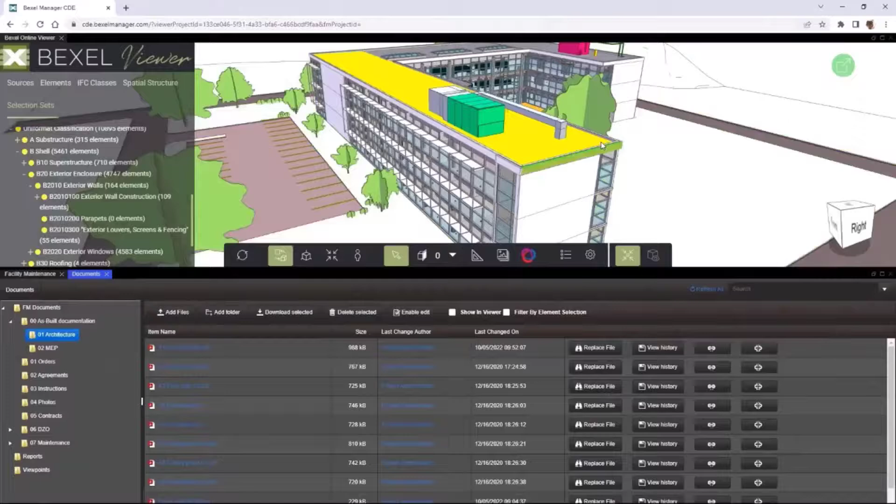The online platform is web-based and data is cloud hosted. All created information is synchronized and updated between this cloud-based and remote Bexel Manager application. And as you may see, everything is interactive, and users can easily find all assets that are related to a specific activity instantly in the viewer.

All FM plans can be reviewed and edited, and any related document can also be viewed using mobile devices. Additional documents or screenshots can be added to FM plans or to the model elements directly, and for each FM plan, users can set notifications that will inform the respective company to execute their activities on time.

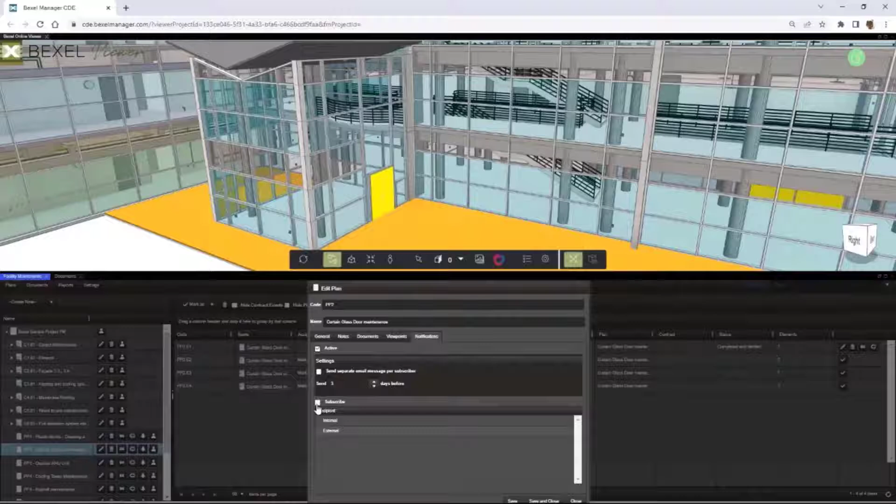Filtering of FM activities and related model elements in a viewer is bidirectional, and users can easily identify activities and all relevant information by selecting any element in the view and vice versa.

Importantly, we are now leaning toward full Level 3 BIM implementation by shifting our processes online, and we believe that all presented cloud-based services are just one big step forward and our contribution to the implementation of BIM Level 3. At the moment, we do have available and operating online services for FM, as mentioned before. From recently, our online model viewer and online Portfolio Manager are functional and operating also.

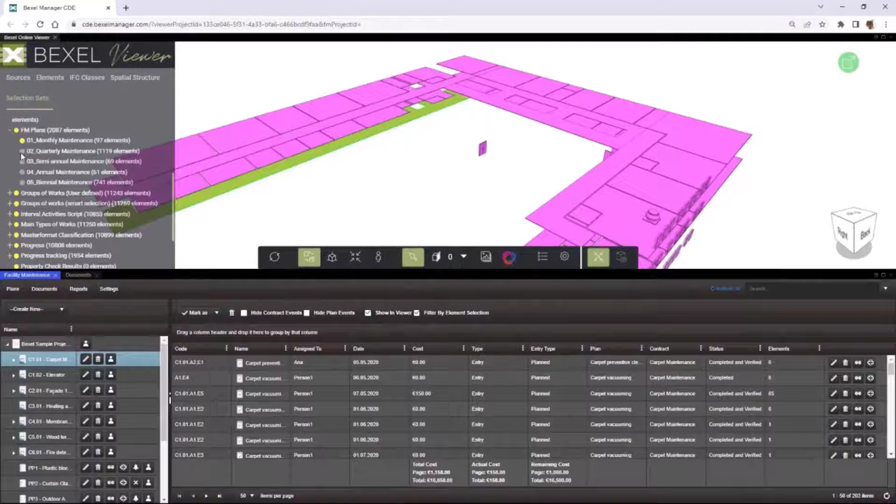And new improvements for these services are being added, and respective options for user management and administration as well. In the upcoming period, we plan to progressively enable all set of Bexel Manager cloud-based services that shall be merged together. It will also include the entire cloud-based document management system, with project and user administration. All that will practically enable users to explore all Bexel Manager projects, revisions, and documents, along with access to entire project and document history, and the possibility to compare multiple revisions of these projects and documents.

The entire workflow presented today, with integration of cloud-based services in the future, will be entirely possible and available through our online services. All the processes will be translated from local computers to online, allowing you to simply explore projects and results using your mobile devices without using a desktop platform.

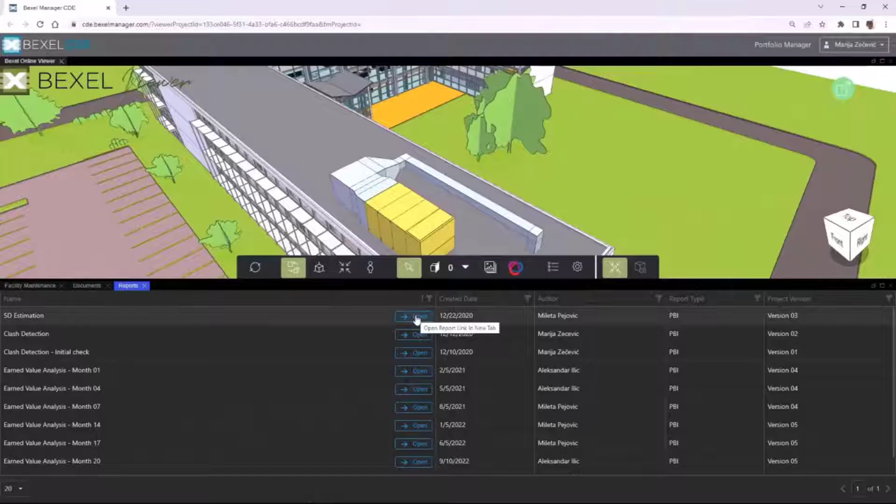I hope that this gives you enough information to understand the possibilities of an integrated approach and the outcomes of synergy between automated workflows and cloud-based solutions. This is just the beginning of BIM Level 3 implementation, and we are looking forward to it.